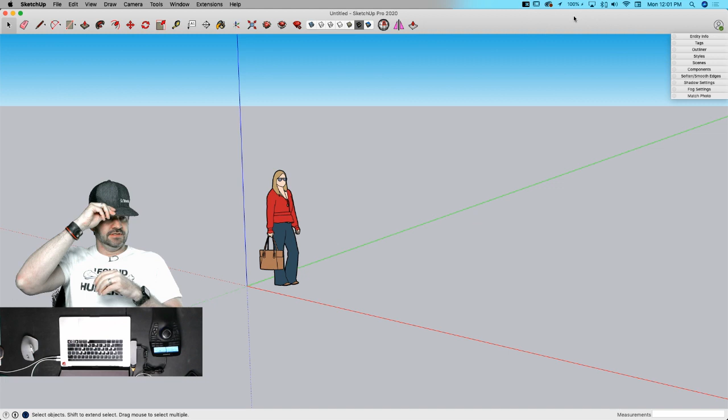Somebody, and sometimes Aaron takes a long time to answer a question, and then all of a sudden 5 minutes have passed, and then I try and answer the question, and everybody's already solved it. This is the perfect place for a guy that likes the sound of his own voice. I can't hear anybody else. So as long as I talk over you, Jody, then that's all that matters. You're pretty good at that, I've noticed.

So one question did already come up that I was going to get, just about to go off my screen. Hold up. Ronald asked over on YouTube, how can I display an extension menu?

The menu up here where it says extensions won't show up until you install extensions that populate that menu. So if you don't have any extensions installed, or if your extensions don't go there, then that won't show up. Some extensions, not all extensions, go here, by the way. Some extension developers will put them under tools. Others will go under draw. So not everyone shows up under extensions.

I think it's even possible to make one only appear in a context menu too, right? Like you could have an extension you don't see anywhere until you right click a thing. That sounds like it could be a thing. Yeah, that sounds like that could be real, and you just got to right click the right thing.

Corey, right beneath Ronald, was wanting to know if there's a schedule for these chats of ours. So as of now, we're doing something live at noon Mountain Time. That's now. So whatever time now is, look at your clock.

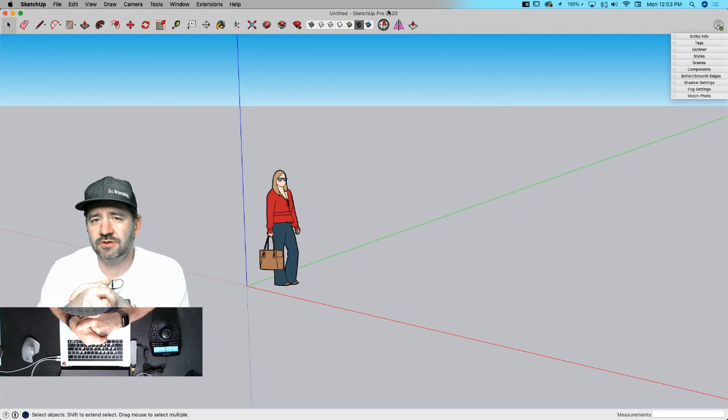I usually do a bigger model and we just kind of chat about a topic. So last week we talked about Star Wars and The Mandalorian and modeled the Razor Crest from The Mandalorian. So it's usually something along those lines. So Monday, Wednesday, Friday, hang out here at noon. It's anywhere from 2 to 3.5 hours, but we don't put a hard timeline on it.

I'll point out, I see some questions are coming in, so hopefully Jody's paying attention. Great, yeah, I did start. Oh, go ahead, I should say. Carry on.

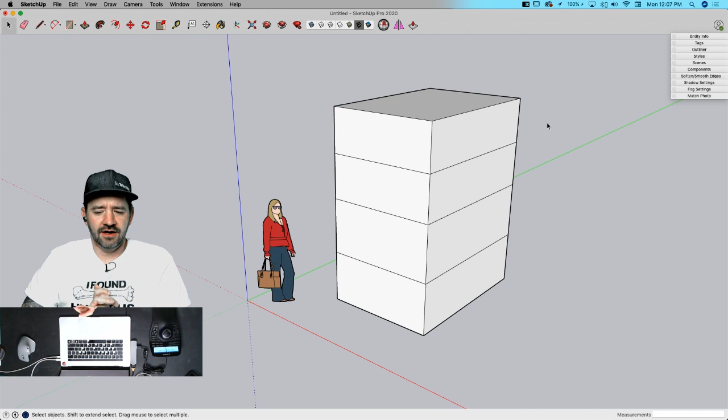We actually made a forum post out of it, so you'll have to do a little bit of digging. It was a blog post, actually, about the top 10 extensions, or not top 10, just 10 extensions I really like and find myself using a lot. Jody can probably find that and put a link to it.

As far as editing points, if you have a single point you want to move, you can always use the move tool, just hover over the point and move it. You don't need an extension to move a single point. If it's something you're doing a lot, like fine-tuning a mesh, it's a paid extension, but Vertex Tools does just that.

So what Vertex Tools is from ThomThom, and what this lets you do is actually go grab individual points, you can move them around with a widget, you can rotate that. Rotating a single point isn't very exciting. Let me grab 3. You can rotate a set of them, or you can even scale them.

So if you're going to do a lot of vertex editing, I can't recommend it enough. Vertex Tools is a great way to do it. The other thing that Vertex Tools is really nice for is if you're doing any kind of quad modeling. So if you're going to be softening or subdividing your geometry and you want modification tools that honor your quad geometry, Vertex Tools does that. So as I'm moving these pieces around, you can see all of my sides of my square staying 4-sided. But if I look at my hidden geometry, they're broken. So it's actually actively keeping this quad geometry there and available so I could come back and subdivide it later. So check out Vertex Tools and see if that's what you would like to see.

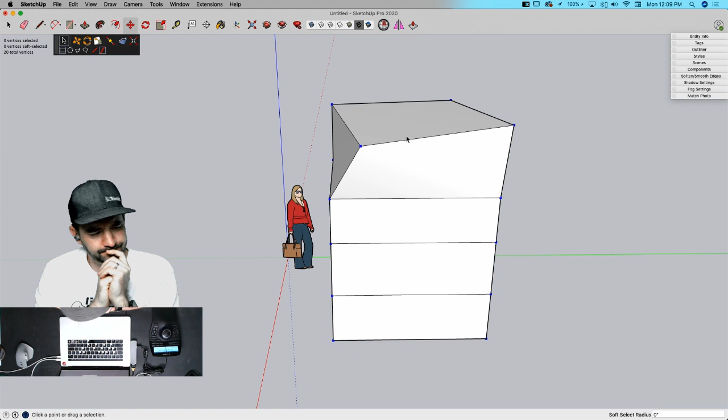Patchworks wants to know if there are plans to improve dynamic component stability. I don't know, I mean, it's probably now a good time to throw out the whole warning of do we talk about plans. We want to make everything more stable, that's for sure, absolutely. We're obviously working as much as possible to make things as stable as possible, make the best software we can. Unfortunately, Jody and I, when we started working for Trimble, signed a stack of papers about this - actually it was virtual, so I don't know if it's actually a stack of paper, but we agreed not to talk publicly about future plans of the publicly traded company we work for. So unfortunately, we can't really talk about what's going to happen. But to be totally fair, Jody and I spend a lot of time working in the world of what exists now. A lot of times I don't even know - I've seen some names go by, people who are on the beta program who work in SketchUp as it comes out in beta, and I don't even do that. I guess I hit a beta a couple weeks before a release comes out, and I'll go make videos for the release. I know Jody does the same thing because he works on our help center - sorry, I was adjusting my volume while talking - he works on the help center, so that's a big piece of what he does too. And we do try to know about what's going to come out, but we don't spend a whole lot of time there, just kind of dabble, I guess.

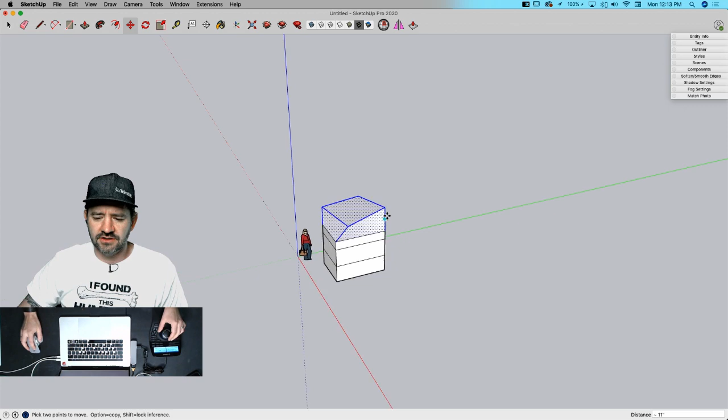That'll keep you from shooting off into weird spots. The other thing that can happen is, depending on where you're at, it can be grabbing. Right now I'm moving up and down above me, but as soon as I hover over this geometry, it's going to jump because it's grabbing this point relative to my first point. I'm guessing your view is weird, so you might want to zoom out. Don't turn on more geometry than you need as you're trying to make that move happen, and use your arrow keys to constrain your movement. I've had that happen before where I start to move something, it jumps off, and then I just orbit around and it's easier to move because I don't have that snap point getting in the way.

Yeah, it's curious that you can't undo it. That's the part I'd like to see in the model where that happens, because that sounds like an extension issue if that's the case. It's worth mentioning that a lot of times if you start an operation and things go wrong, if you hit escape before you click a second time, that will undo the operation.

Somebody asked how we pick which extensions we look at in our videos. Almost every one of them comes from something like this, where somebody says, hey, how do you do this? And it turns out an extension is a good fit. Then we'll take a look at it and make a video. There's no official submittal process that gets an extension onto a video. Most of the time it's just something somebody's asked about, so I end up looking at it and doing a video for it.

I do try to do videos for complete extensions that are available now. I've had some people send me beta extensions to look at, and if I have time, I'll take a look. But I don't try to do videos for stuff that's not complete, not available, or that I personally don't find value in. If it's some weird extension that helps you draw stars or something, and it's not something I've had any call to use in my personal design or the designing I do with you guys, it's less likely to get looked at.

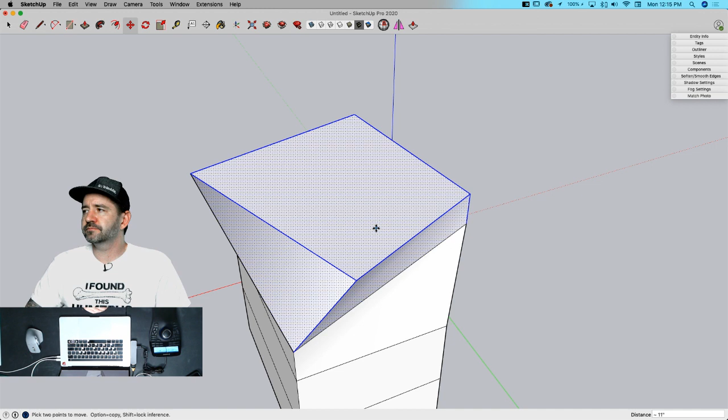Personally, and this is something Joey and I have talked about before, I like to keep as much conversation on the forum as possible. So if you've private messaged me asking how to do this or that, you've probably gotten the response: post this question to the forum and we'll help you out. Not because I don't want to answer or I'm unable to, but I'm a big fan of the forum and what it does and how it helps people and helps itself. I think that's part of what makes the forum so awesome - you can go ask, and that's the whole purpose, for it to be a community. Rare is the occasion that you get ignored, unless you're asking something completely off topic or not giving much detail.

Jim asked a little while back, so he may have already gotten this fixed. He said that sometimes when he's applying textures, SketchUp has a tendency to apply the colorize checkbox automatically.

Colorize? Colorize? I don't know if he means that it's like he's applying colors to something or. Well, let's go here and grab something. I'm gonna grab this one.

This is for you. So he has a follow-up question. He said sometimes colorize has been applied without his input, causing textures to have some strange color casting, like colors being applied to a material that's not the default color.

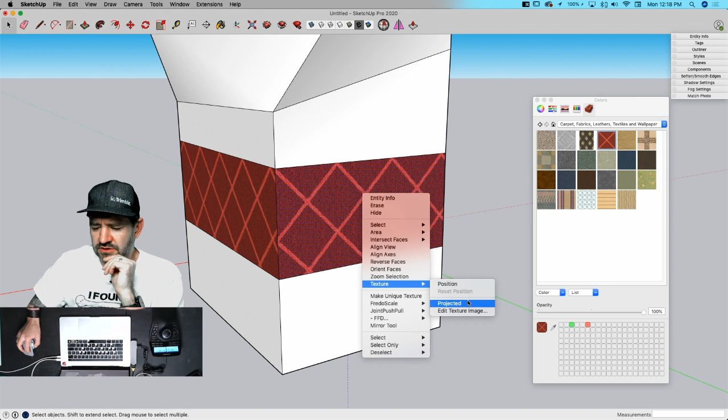Yeah, I'm a little confused, Jim. So if you want to clarify what you mean by the colorized checkbox... If I come in here to texture, if I grab just this surface and go to texture, I have the ability to change position and projected, but I don't know of a colorized option.

I don't, oh, unless it's a Windows only thing? Could be. Dave already asked him to post some stuff on the forum about it, so maybe it's something that can evolve there. Yeah, absolutely, if we can't get it here, let's definitely take it to the forum.

Okay, oh, I don't know what that one is. Oh, that's unrelated. So, Jim Saki, I don't think that's it. Saake, how would you pronounce that? I actually wanted to, worked with a coworker who had that last name. Sake. Oh, okay, all right.

He said, can your presentation show the option keystrokes on screen that get pressed when you model? So you have that on, right?

But do you do it in your other videos too, like some of the more proper ones? I do, it depends on what I'm showcasing. Sometimes it's not, and I need to do better about that. So I'm sorry if you've come across a video where I hit a shortcut key and didn't talk about it. My intention was probably that I didn't want you to get wrapped up on that, I was hoping you'd pay attention to the next part, but that's probably a dumb thing for me to think. So I do try to keep it on anytime we do these live streams, and I'll try to do better about making sure it's on when I do my recorded videos too.

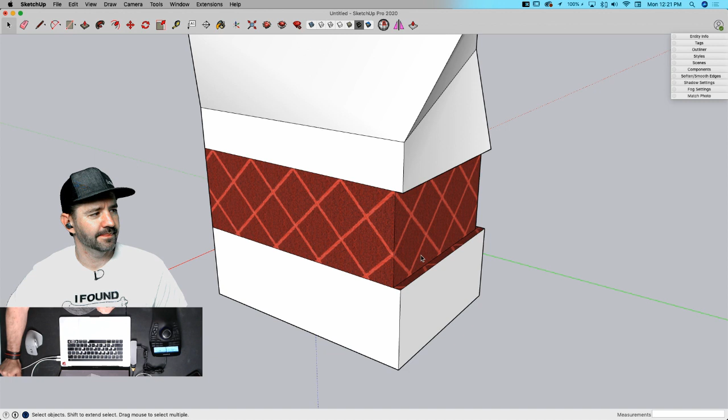What we should do is have a Reddit AMA where we have some engineers there and we can ask them. Hey, that brings up a good question.

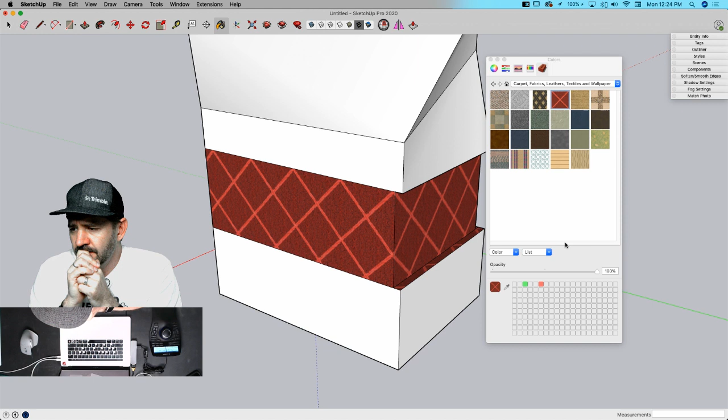Sorry, I went to look in the forum to see if there's anything there. There's nothing yet - nothing on colorization. Miguel's back asking for models of stuff.

I think it's worth mentioning, Miguel, that we're not really here to model one-off stuff for folks today. He wants to do a low poly Nissan Cube, which YouTube pointed out is already low poly by design.

Here, let's see if I can modify this into one. Let's get rid of this. Here we go, put wheels on it. There we go. Yep, so remember those commercials - was it the Nissan Cube that had the hamsters, boom, and the toasters, and the boom?

Tiny Nest said in SketchUp 2020, hovering the move tool over an object causes the object to become transparent, and it's causing slowdowns. This is a new feature of SketchUp 2020 - they're getting slowdowns on complex objects.

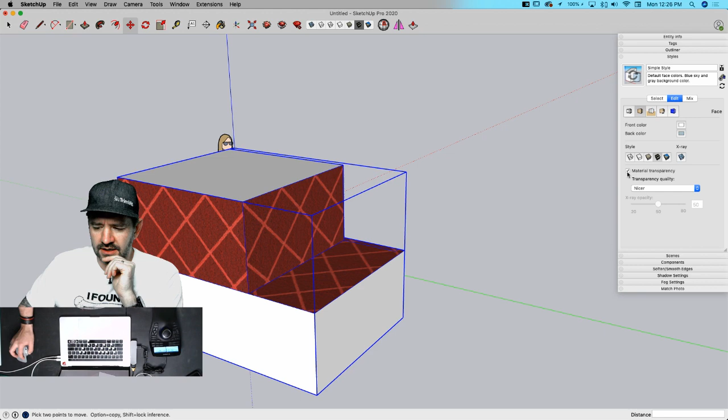Yeah, so if I move over the back corner right there, it does that. Let me make sure I show where this is correctly - if you go to your style, then edit, and click the second button, which is the face information, you have the ability to set your transparency quality to faster or nicer. You can actually turn that off, which will help with some of the speed there. That's worth looking at, because I know what you're talking about when you have a big scary model - it can all of a sudden do that thing where it sticks and then jumps.

But if you take a look at that, change your transparency presets, and that should help with that happening.

Julka wanted to know if you had any tips for creating a wicker basket. And while you're answering that, Hornox can't read your shirt.

Sorry. Humerus, is that like... oh come on, man, made from chickpeas? How do I kick a co-host off this thing? Where's the any key?

Dave says he's got an image uploading for us. That's good. Okay, wicker basket. Wicker basket, you have any thoughts?

I mean, there's a weaving thing I think would be the trickiest part there, right? So sort of organic. Personally, I would project a texture. I wouldn't, yeah, I know that sounds like a cop out. I have seen some people do it where they had the internal structure, the cane or whatever, come up like this, and then model the curves that go back and forth around it, do a follow me, and then copy and resize each one. You could absolutely do that, but if it's like a hero piece you're trying to create, that cool model, you could do it, but it's going to be super heavy, super fast. So that's the piece I'd be a little bit afraid of. I didn't mean to use that as a cop out, but that would be my first thought.

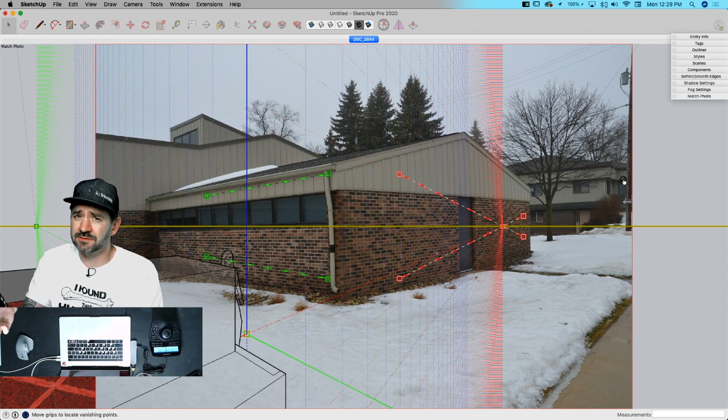Go ahead and import that. I'm going to import it as a match photo. All right, so when you start to... oops, I bumped my 3D mouse with my elbow, I'll have to lean this way. When it imports, it's going to import. So the first thing is the picture you import is probably the biggest piece of what's going to work or not work. That's why I didn't want to just go start browsing Google for an image.

You do want an image like this where you're looking at the corner. The secret to a good photo for Match Photo is these lines right here. So I'm looking at a corner. This is a corner of the building, and it vanishes off in both directions. What I mean by vanishes off is this bottom line angles up on my screen, and this line angles down. Same thing on this side.

See, both ways, they both kind of go like this off into the distance. That's what's going to let me take my green lines like this. There we go, make those across that line. And then this one, like this, gets a good vanish. See how my two green lines go like this? It's not a sharp thing, but you can see how they kind of go together off into the distance. That's what's important. Same thing over here on the red lines.

I would say 4 out of 5 times that people get frustrated by Match Photo, it's because they're using an image that's just not suited to Match Photo. So if you're looking at the side of a building straight flat on, that's not a good solution for Match Photo. If it only vanishes one way, it's not a good Match Photo. So you do want this perspective view that lets you see that off in the edge. It also probably helps to not have other stuff in there.

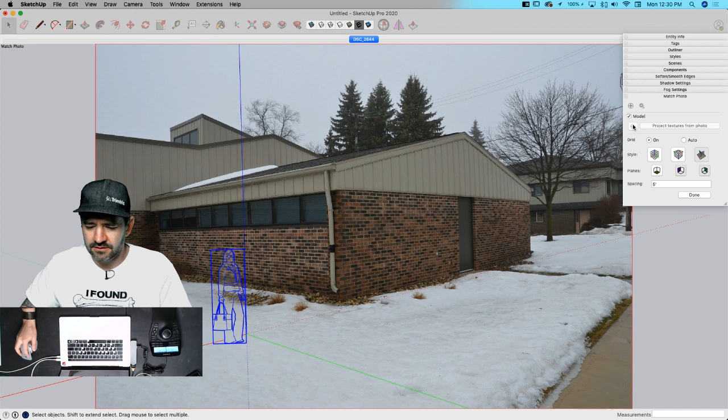There we go, go back to Match Photo. Once I get that in there, I can come in here now and say, okay, draw my line up, draw my line over, draw my line down. There we go. And I can push-pull that across like that, and start working from there. So I know that that is the same shape as what I had here.

Let me project that.

Oops, I think I just painted brick on Laura's face. Sorry. Oh, sorry Laura, wrong place wrong time. She's camo. Oops, I actually looked at... got her urban camouflage on. Just stand still, yeah, it's effective. Who's that creepy lady in front of the school?

So like I said, one of the biggest things would probably be just keep an eye on, or make sure you have the right photo to start with.

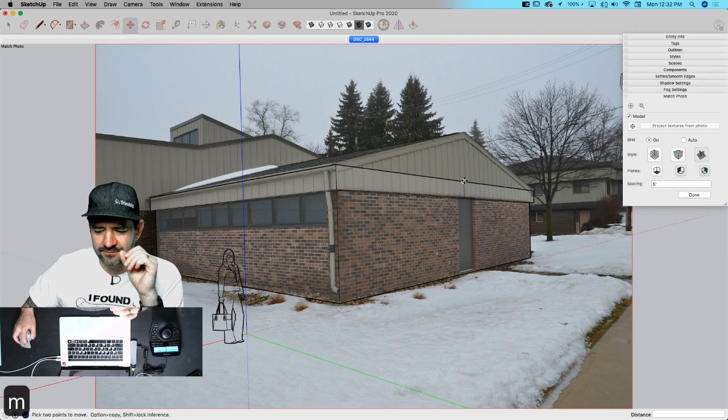Yeah, I think the comment I've always seen was like you don't want to use a cropped photo. As soon as you crop it, I don't know, I don't understand what magic is happening with cropping that somehow causes issues. Correct me if I'm wrong. One of the things that happens a lot is people will get photos that have been photo edited, so something has happened to the photo since it was taken, fisheye or something, and that'll cause an issue too, because that creates distortions that can't actually bounce back from that in reality. I know we're struggling to recreate reality here, so that could cause an issue.

Do you know if you can draw a rectangle about center in the web version?

I want to say yes. Okay, all right. Was that for an answer? I want to say yes.

If you hold down the Option key, is that right? That's not the Option key. That's the any key, yes. If I come in a rectangle, it says Option, or I think it's Control. But all it will do is toggle real quick between the two corners. Oops, unless you hit Z instead.

No, I can't make it happen. I don't know, oh, it might not be in the web version yet then. That is absolutely possible. Well, if I hit Option, it says Option equals select corner. And then I hit it again, and it says Option equals select center. So I don't know, maybe I'm just doing something wrong here.

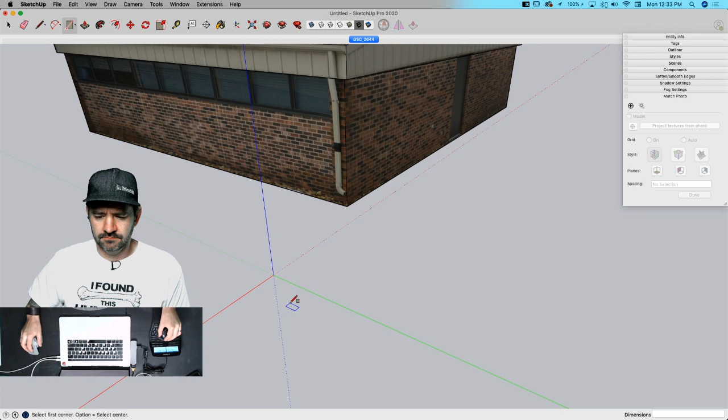In theory, yes, hold down or press Option to toggle between the two, or Control. Daniel would like to know how to apply material over a cupboard door so that it's one fluid pattern across both.

All right, let's look at that. I'm going to make a little example across two doors. Cupboard right here, this is my cupboard. I'll select that, make it a group. And then I'm going to put a cupboard door right here. Make that a group, and then I will make a copy of that group over here.

So we're going to say that these are our two cupboard doors. They're separate groups, separate materials right now. So if I wanted this to go seamlessly across, if I came in here and applied a material, I grabbed the brick off of the building. It's an odd one, but since it's not a repeating pattern, it doesn't work real good.

Oh, I know, I could just go, here, I'm going to come in here. Let's just say for fun that I had something like this, and I wanted to do... easy for me to say. All right.

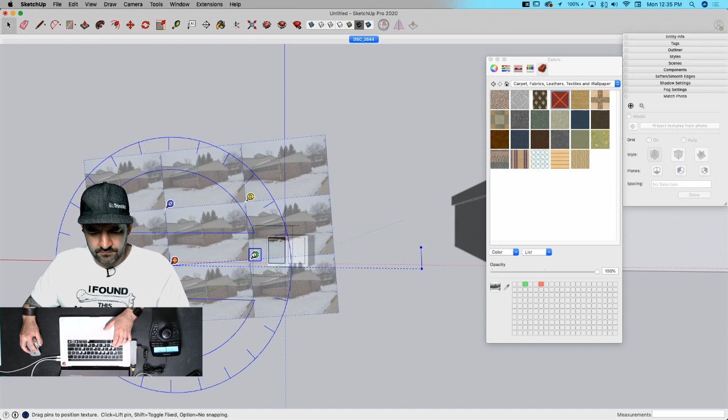Yeah, that would be a definitely good question, but let's say I had something like a photo. I wanted to actually put this texture across two things. These happen to be cupboard door analogs. So if I come in here and I put that... oh, let's go home. So when I put that on there, I get something totally different, even though it's the same texture on both. So what I can do is come in here, pick this texture from before, and then apply it here. That should continue the texture across both pieces.

If you just apply it by picking it from the color picker, it's going to reset the origin and any transformation you've made to that material, to each material you do new. By picking the same one from before, you're saying continue that texture onto this next piece. So that would be the solution. So if I wanted that texture to continue onto this piece in back, when I come in and pick it here and put it on here, well, that's because I just picked it, sampled the same one.

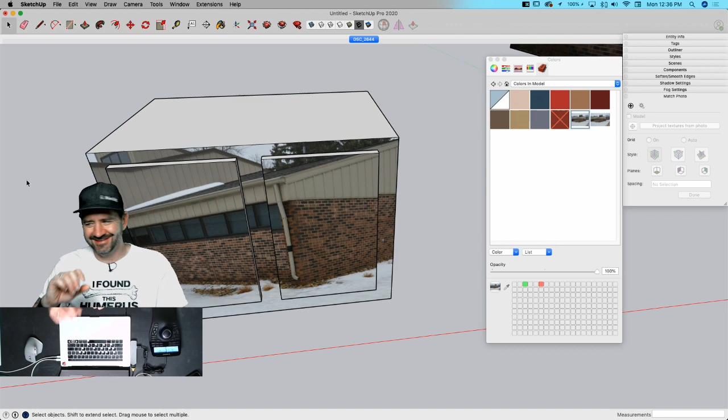Dang, I didn't get it wrong. Sometimes I can't help myself. Sometimes I get stuff right. Whereas if I was to pick from here and apply it here, that's what I should get. I'm sorry, I'm sorry you can't screw it up. I'm sorry, I'm so sorry. That's something we should all aspire to at some point, being so good that even when we try and break things, we cannot do it. Just can't get it wrong. Well, that's not true, you guys have been watching long enough to know that I can screw up if I really don't try hard enough.

Kai would like a dark mode version of SketchUp. That doesn't exist at this point, right? We haven't ever released one, we've only got what you see here. I have heard that request before. Yeah, I have too, but not yet. It's not there yet. There's a lot of chatter about the colorized stuff, so not new questions. Let's see.

I just saw a request for a SketchUp logo. I can do that pretty quick.

While we're waiting for more, I'm going to draw a square on the ground that is 3 foot by 3 foot. I'm going to pull that up 1 foot. And then I'm going to take two sides and offset it 2 foot.

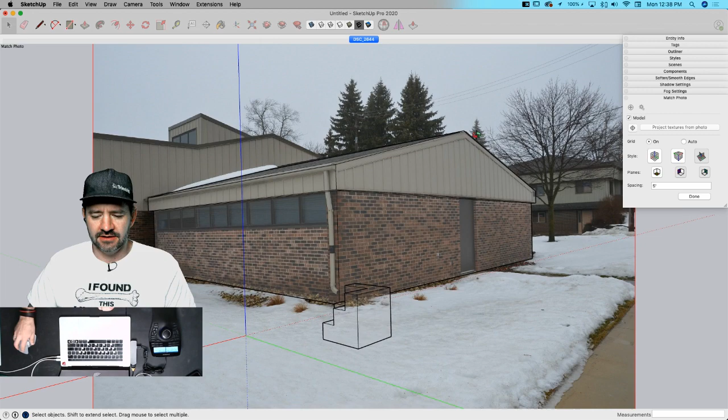In theory, yeah, reality, yeah, that happens. Yeah, you don't want to mess with that. Don't do it. Actually, just don't do any zooming tools, because as soon as you do any kind of zooming or orbiting, it's just gonna shoot off into crazy town.

Dave said the cropping thing, as far as Match Photo, cropping changes where the center is, which I guess is why it becomes problematic. Oh, that's good to know. So that's why stealing pictures from the internet can be risky too, because you have no idea if it's been cropped. Yes, I will agree with that.

So Nathan, it looks like he's trying to make the full push in Layout. He said he's using 2018, he's trying to do more work in Layout. However, Layout's not user friendly when it comes to scaled drawings, and I'd love to see a scaled drawing work more like a real drafting program, real in quotes, because it's not feeling like he's getting to work with that scale.

You recently did a layout video, right? Yeah, so we started a layout series. Every Thursday we're doing layout videos for the next couple months. I did 2 videos so far, just an introduction one and then one on modeling or model windows. But one of the pieces I want to do is scale drawing at scale. I say that because I haven't really got into it too much, I'm learning a lot about layout as I go. It's actually been something I have always known I wanted to spend more time on, getting better at layout. So I will take a look at that, Nate, and I might reach out to you to ask what we could do to make it more like other programs to draw at scale.

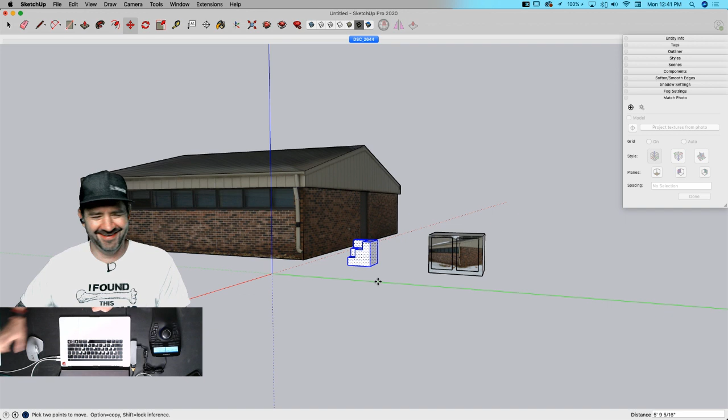Kai wants to know if you ever play Qbert on the SketchUp logo, and it's funny he mentions that, because Tyson's video from last week where he was literally making Qbert-looking drawings, I kind of wanted to play Qbert right now. That would be fun. I remember Qbert. I feel like the SketchUp logo is more like Crystal Castles, not Qbert. Did you ever play that? No, but I do go—it uses like a little ball, rolls around a little ball thing. Oh yeah.

And you have to pick up gems periodically, and you're a little bear, and then the bees come along... no, maybe I don't remember. Make sure you don't get stung by the bees. I don't know, sorry. All right, little tangent there. Okay, got it out of the system.

Let's get back to work. So it looks like there's a big back and forth with Kale, who was wanting to do draw about center. He's using SketchUp Make, and I don't know, it might be the old client version of Make, which did not have draw around center, rectangle around center. Yeah, I think it was 2018 that around center came out. That's what Dave's now said like 10 times in this thread. Yes, Make will not have draw about center.

No orbiting and match photo. Oh, that's the studio confirming what YouTube already said. Don't do it. No good. No bueno. Yeah, it is an important note.

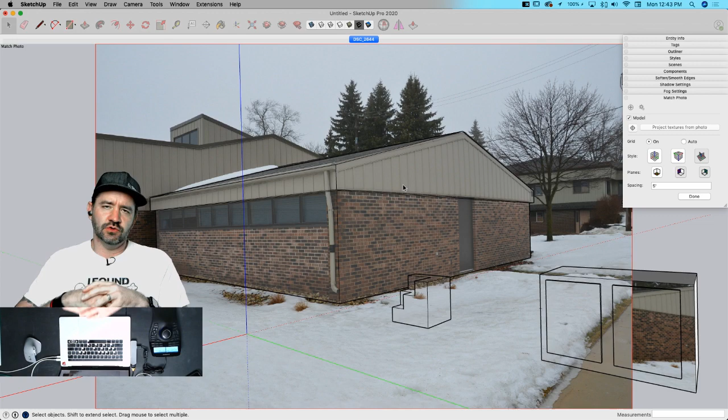That's kind of how match photo works—you're setting a camera at a specific location. So a lot of people ask, how do I model the other side of the house from here? You can use match photo to get the general geometry in. Once it's in there, it's just SketchUp geometry, so you can do whatever you need to at this point. But the actual modeling in that specific view is set from a camera at a specific point looking directly at that model from there. So that's important.

Looks like there's a decent chunk of questions coming in about Make. I want to be clear that we haven't made Make since 2017—that was the last version, release. And then after that, we moved to the web version. The intent with Make was never for it to be a professional application, which is why it doesn't have imports for DWG and DXF. It's mostly there for you to draw pictures or draw SketchUp models. If you want to do stuff more professional, like DWG and DXF formats, you get that in the Pro version.

Looks like they finally found the colorized version. I don't know if we've got the problem worked out though. Mike would like to know what the pink lines mean when you're moving stuff around.

Let's look at that. All right, here, I'm gonna make this into a group. I'm gonna grab this group and drop it on the roof.

Dave just said a friend suggested to him that if you added a HEPA filter to your Mandalorian helmet, you could make a fortune. Yeah, I think he's probably right. It's true, but there's still only one of them, and I'm not making more. Oh, do you have to give it to other people? Sell it to other people? Yeah, that's okay. Unless somebody wants to just pay me to put a filter in it, then we could do that.

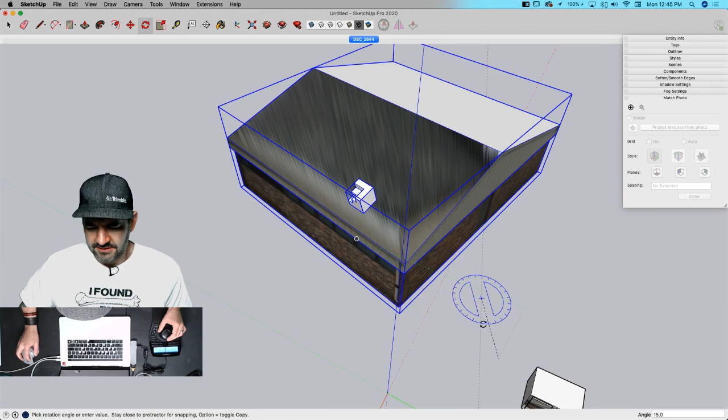All right, so I'm gonna grab all this and get it all off axes. Let's get silly with this thing. So if I go to move this right now, as I start moving it, I can use the keyboard arrow keys same as I normally do. We're here just constrained to green, red, blue, but I also have the ability of constraining to magenta.

Magenta is parallel or perpendicular snap. So if I wanted to move this along the roof parallel to this line, I can grab it, hover over the point I want to go parallel to, and as I move parallel to it, it'll jump and start moving parallel to that line. Likewise, I can come perpendicular to it, and it'll give me that magenta line showing perpendicular snap. I can force that snap by hitting the down arrow key—down arrow locks to parallel, a second time locks to perpendicular, and a third time turns that lock off. So magenta is actually two snaps, toggling between move parallel to and move perpendicular to.

Okay, that's a good question. Thanks. I like how in the big scheme of things, these are not pink or blue—it's cyan and magenta, puce. Well, it's darker than pink, so that's why I use magenta. But yeah, it's lighter than purple. I'm not correcting you, I mean, that is just the way. It is the way. This is the way.

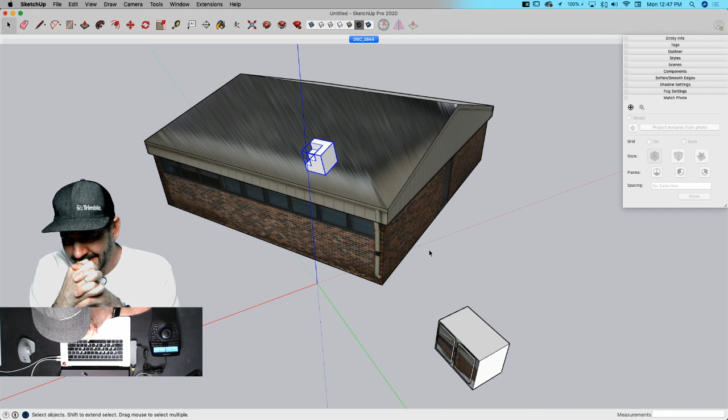Yeah, sci-fi warrior helmet. So it looks like we kind of answered a bunch of these questions about layout, or pointed out that we don't have necessarily good answers, and questions in the forum will be good, also keeping an eye on the videos would be good. So I'm kind of running low on questions - quick, ask something good. If I ignored you, it wasn't deliberate.

Isuru would like to see a gabled roof modeled. I think I just did that. They're also curious about using Curviloft on the wicker chair, in which case I would encourage Isuru to go look for...

Hey, let me search a term for that one. Let me throw something out here real quick. I'm gonna do wicker in like 5 minutes.

Right, so here's what you could do. So if I was to come in here and do something like this, and maybe I want to take this shape and I actually want to do something more like this. All right, so say I wanted something like that, and then what I want to do is get a line, midpoint to midpoint, and midpoint to midpoint, and I'm going to take one of these lines right here, copy it from here to here, and I'm going to draw an arc from the center point here to the center point here, take that arc, and I'll rotate it, make a copy of it like that.

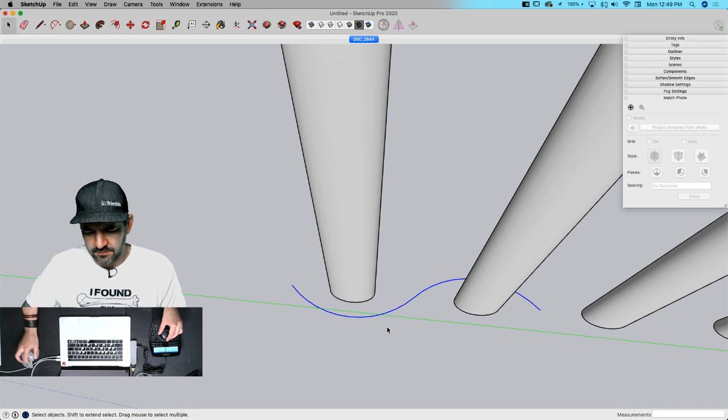And then I'll grab both of these and move it from the end of one of these vertical pieces to 2 down, and then say do that 5 times. Should take it all the way through. All right, and I'll grab all that and I will weld it.

I did that. Won't let me weld it. Okay, don't weld it, fine. Never mind, make that a group. And then I'll come in here, grab this same shape, copy that. Oop.

It definitely looks like this topic has come up a time or two on SketchUcation, but I can't quite find it. Something's going on with my keyboard.

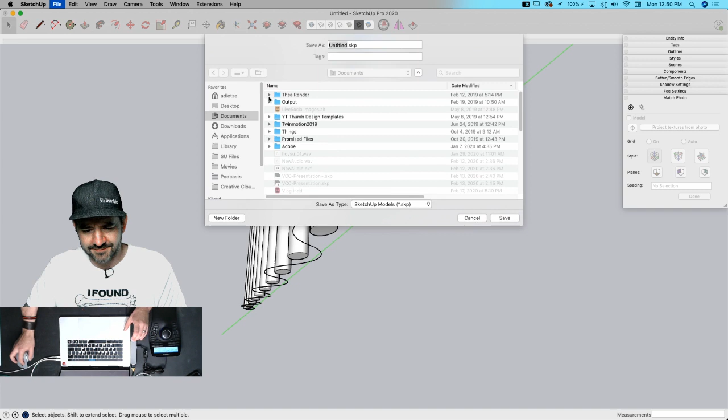All right, let me grab this. Command C - every time I hit Command C, it's ignoring my command. I also can't weld. Is it one of them Bluetooth keyboards? Maybe, but it's connected to my Mac. Hold up, probably because I haven't saved. Because you shouldn't need to - you're not really doing anything of import.

All right, we haven't figured out what we're doing Wednesday or Friday yet, right? I got an idea for Wednesday, and I think I have an idea for Friday, but we always take ideas. Okay, so well, Gavin's wondering if we already have what the plans are that we have already. And I just show up and look pretty, so I don't really know.

Just play to your strengths, my friend. All right, hold up, I'm trying to address the elephant in the room - no, my issues, just some of them. Don't worry, we're not getting into all of them.

All right, sometimes, you guys ever do this? You find that sometimes I'll come in here on like a Friday and realize I've had SketchUp open for 2 weeks straight. That never ends well. Right, yeah. I probably try and make a point of reopening it on at least a weekly basis. Yeah, I don't always do good at that.

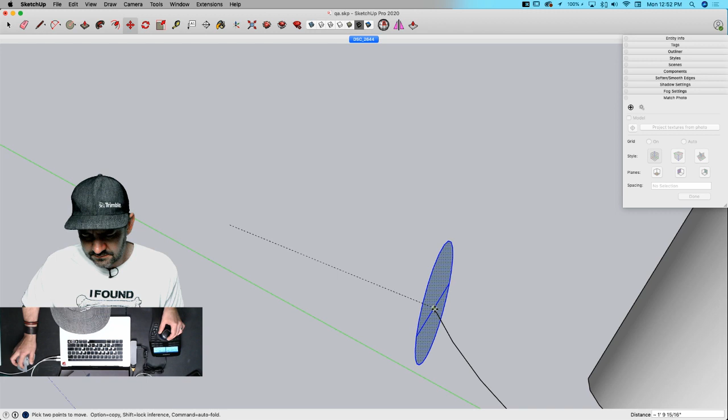So, anyhow, Gavin's asking if we can model a Lego tap, and I'm not sure what he means by a tap. Yeah, I don't know what that is. Could you clarify or post a picture of what you got, Gavin? Put it on the forum. Here, I'll even get you a link.

Okay, maybe, there we go, find it. All right, so I'm gonna take this whole run here, do a quick follow me with that. It's gonna give me one of those. I grab that, make it into a group, I'll move it vertically so it crosses this. All right, and then I'm going to take that option and bring it up here like that, and we'll do that like, I don't know, 9 more times. That's close. All right, and then I'll grab every other one, I will use scale to -1 to reverse it.

All right, so we got a basic wicker pattern right there. I left it inside out just so you could see the different pieces. But that piece, we could actually take all of that, make it into a group, and then run something like TrueBend.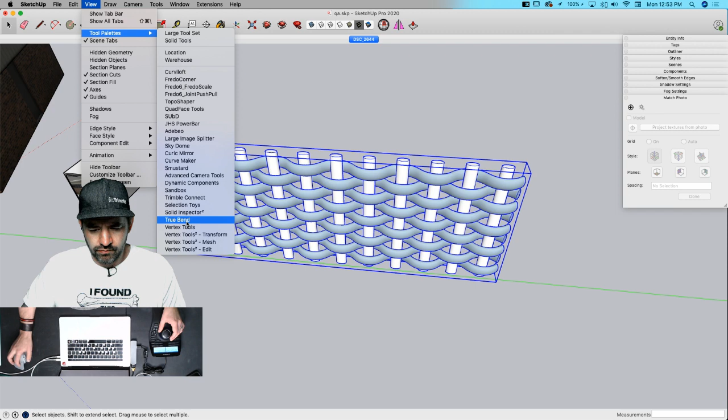Is there a reason you didn't do components for that? Yeah, I didn't have the 3 seconds to do that, apparently. I'm going to have to click a thing, type a thing, and then click another thing. Against the red axes.

Bender was wondering if you could model a blanket or a cushion pillow as well. There we go, so I could do something like this. Ooh, look at that. Now if you make that small enough, bam, that could become the cushion pillow. Wicker cushion, because who doesn't want that?

If you zoom in close enough, that's just what fabric looks like, right? That's true, if you put your eye close enough.

That's going to be a rough model eventually. This is a lot of geometry to bend, so this is going to take a second or three. But you could do something along these lines, make components, and then move those into shape using something like TrueBend or Flowify - I'd probably go for Flowify more, but I'm not good at it, so I didn't do that. You could do wicker something like that, but you can already tell this is already a lot. Let me just see how much geometry is just in this small piece.

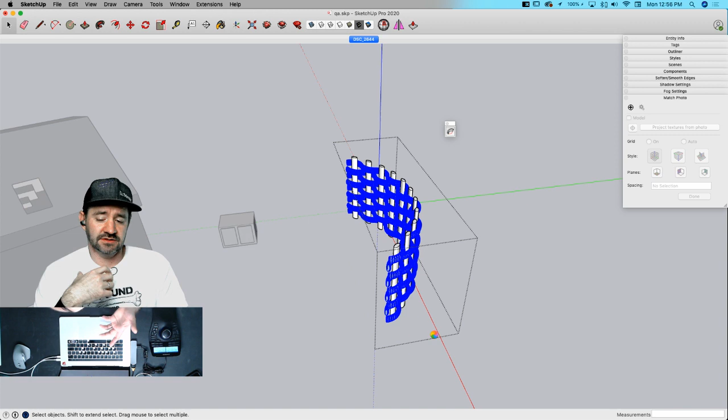Yeah, if you do want to do something like this, I would recommend doing a square rather than an oval. I know a square is not what it really looks like, but do a square and then soften the edges, and do low poly arcs. Rather than 12 segment arcs, do like 3 or 4 segments, and keep it all real low poly, because even with just this little piece there's a lot of chunks, a lot of geometry, and it's going to slow down SketchUp because it's just so much geometry.

All right, so we've got a billion faces. 15,000 from Andy, 544 from Kale, a billion, 21,000 from K Brooks. I'm going to say 21,001. Oh, is that how it is? Is this Price is Right rules? The nearest to the proper number without going over. I feel like if I were on The Price is Right and someone did the 'and one' trick, I would jump over my thing and punch them. It's like, what are you doing?

Seriously, just gaming the game, man. All right, I don't know, whatever it is, there's enough stuff here that it's actually causing SketchUp issues. Well, your entity info's collapsed, so maybe it's all been there this whole time. Yeah, I'm sure it has.

Do we have any other questions while we give this one more second? Let's see, Isuru has acknowledged you have a lot of patience, to which my response is, you're not even a doctor.

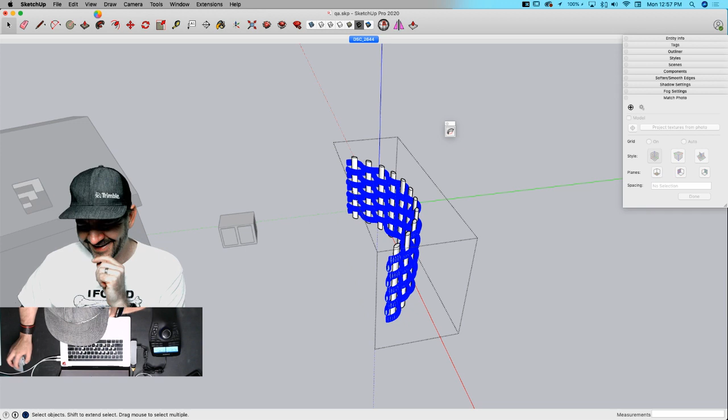Andy said that the pink color is actually cerise, which I've always heard as magenta, but I'm open to other colors, I'm not a colorist. Joey's no colorator, I don't see colors, I only see black and white. Oh, wait, no, those are colors, dude. Dang it, I see nothing, everything's just a wash, static. Right, there's not really... I'm scrolling.

There was a question of how do you change the loading logo, and why is it showing not responding from Sid. But you don't change the logo because the logo is the product, so that's not going to change - it's sort of like free advertising. As far as not responding, I would say probably because that sounds like the software is crashing, SketchUp for web maybe. That is not a feature.

43,688 entities, folks. Let's see who's closest without going over. Andy adjusted to 49.5. JDC—oh, decimal point's in the wrong spot. What is this? Amateur hour? Well, it's math. I think D-Hammer with 30,000 would be closest without going over. Nice work.

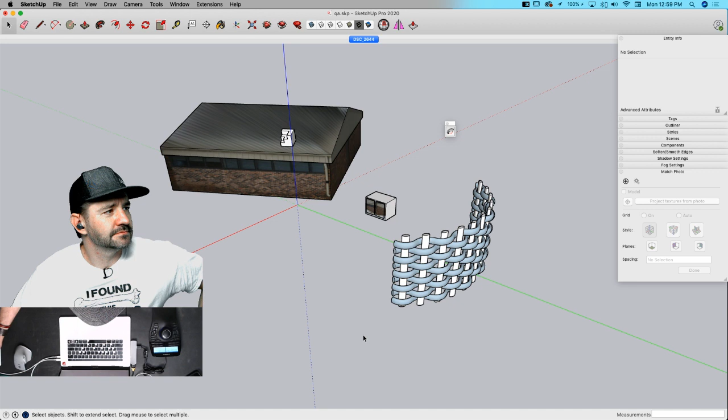Well, there's not much we can do here. Pruth Farage said his SketchUp file won't import to Lumion—file size is 70 meg. You should check out the Lumion livestream for that one, or head over and ask those guys about it. You can try reaching out on our forum too; we have a handful of Lumion users there, but for real help with that, you'll want to reach out to Lumion directly.

We've had a couple requests to model a 3D mouse—never gone for that one yet. And Gyrus chimed in asking for a curved ramp. I don't know if he was baiting you, because that seems to come up every week at the Q&A, two or three times.

Dave said to reset the axes. Did you change them? Did you move them? No, I moved this—I rotated this, so it's gonna be a mess if I go into here, because I broke things. I broke them good.

Have you heard anything about the 3D Basecamp? Any news? Still nothing official. I want to say something, as much as everyone wants to hear something—but dang it, okay.

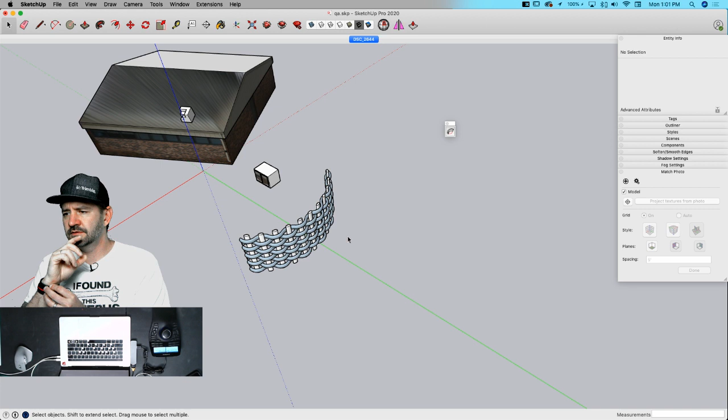Julka asked to look through the comments about Colorize, and honestly I've been sort of skimming past because there's a lot of them, and I didn't think there was continued discussion. Is there currently an outstanding question about Colorize beyond the picture posted on the forum and the acknowledgement that it's a feature in SketchUp for Windows? A couple people said what it was and that you can click it off. Jolka said for Colorize, it only happens when you add new materials, and then it changes color to sepia or different tones—turn off the Colorize option and it will work. That was a problem they were having last week, but I don't know if that's a bug or something to fix. As stated earlier, neither of us are really familiar with issues with Colorize, so if you're having an issue, go look for the issue someone else has created, or post a forum post about it so people will talk about it and developers will see it.

How to make a spiral conveyor and make it dynamically adjustable—that sounds a little too big for this show. I don't know what all those things are, but for SketchUp, I'll say spiral stuff is difficult, especially making it dynamic, because as soon as you move up a spiral, you're not just moving an array, you're moving around and moving vertically. So with spiral stairs, it's not just a question of move this step this direction and do it 10 times to get 10 steps—you have to move up and over, up over each one. There is, I believe, an extension—Move Copy or something—that makes that easier, where you can take something and copy it relative from here to here multiple times. But I don't know specifically what that thing was called.

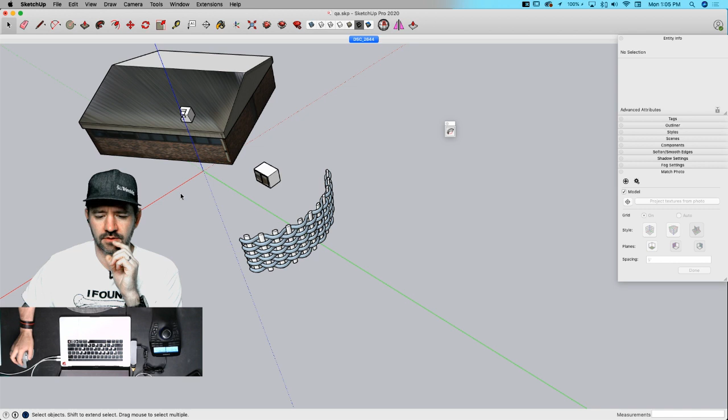For a couple of degrees? There's magnetic north and there's true north. I've definitely run into that. I guess if you're past the point where you're worrying about what's on the map, then just unlocking it and rotating it from the axes would probably work.

The reason I say that rather than moving the model directly: if I take everything here, get a group on here, and rotate it 2 degrees, now I've moved my model. The problem with the axes is anytime I come in here, right click and hit reset, it's going to go back to where it was. So temporarily moving it and then doing anything that resets it is going to put it back. I would probably say rotate your model relative to the axes and leave the axes where it is. That would be my initial thought.

I said magnetic north, but Dave shouted out solar north, and I forgot that. There used to be solar north functionality in SketchUp. It's moved out as an extension now, so you have to install it separately. It'll give you basically a fourth axis, an orange line showing what is north according to the sun and solar calculation. That's a good tool to have turned on, and would probably be the best thing to take a look at.

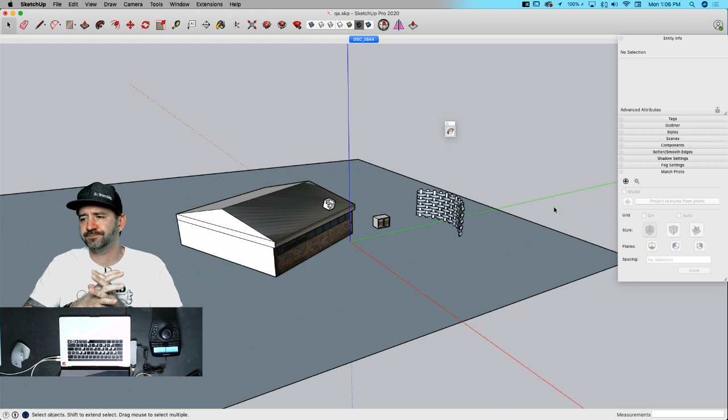There's an updated image in the forum post now. When he says tap, Lego tap, it's literally a tap. I thought that's the only thing I could think of, but I thought surely that's not what he meant. So how would you model that sucker?

I don't have the exact dimensions in front of me, but what I would do would be something like this. Forgive that the dimensions won't be perfect, but this process would be the same. So I would start, and see how close that gets me with this shape.

Okay, so I'm gonna have to do a little stretching here. Pull this down a little longer. Move this vertically. After this, you have to make Lego beer.

I was going to say you have to make a Lego die, and that way you've got a set.

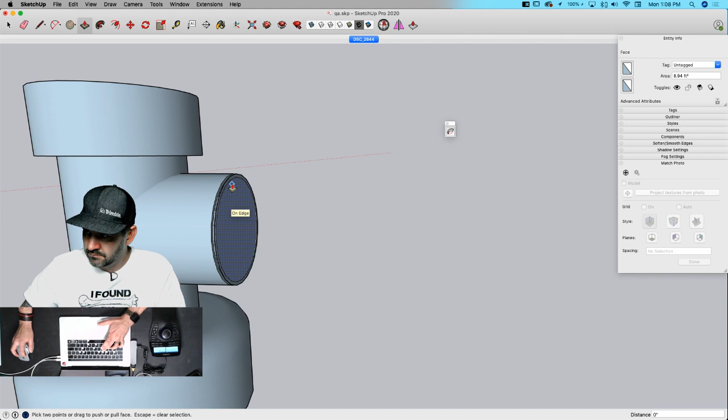And then this last piece, I'm going to close this real quick so I can put this in like this. I'll offset that ever so slightly, pull that out, pull that out. Broke something, there we go. Actually, let me do this, I'm going to scale this down anyhow.

Did you have to model any of these for the aluminum Falcon? This was not an issue for me, no.

Oh, all right, because they don't wash their hands in space. That's right, you ever notice that? Nobody ever... oh, I guess they do sometimes. I'm gonna go a little geeky with a Star Wars question. If you've ever been to Universal Studios, they've got the Harry Potter world, and you can go get butterbeer and drink that. What would they have at the Star Wars world? What would you be drinking there? Blue milk, that was going to be my question. Do you get it from one of those big... oh, they just have whatever those creatures are, things sticking out of the wall. You got to go squeeze your own out. I don't like that. I don't like that at all. Ew.

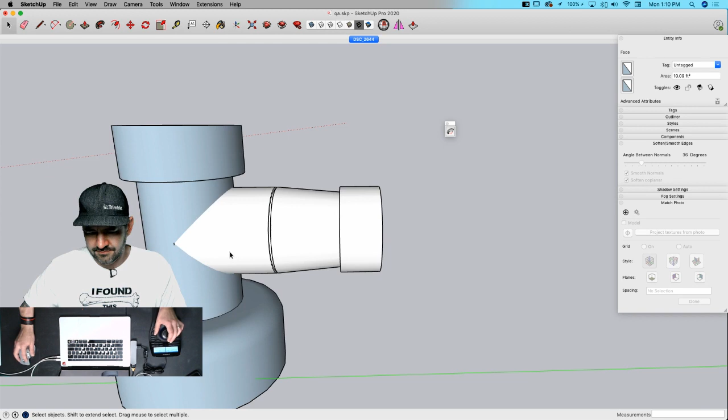YouTube's wondering why I always say aluminum Falcon. The reason is there's a short by Robot Chicken. They did a whole series of Star Wars mini skits done in stop motion with puppets. In one, the Emperor is told the aluminum Falcon blew up the Death Star, and he responds, 'What the hell is an aluminum Falcon?' because he misheard Vader. So now I just always call the Millennium Falcon the aluminum Falcon.

So thank you. You're saying it's the Emperor's fault. It's the Emperor's fault, I'm just quoting the Emperor. All right, it's really funny though. I encourage everyone to go watch Robot Chicken Star Wars, just do a search for it.

I would do something along those lines. I don't have any of the dimensions on there, but yeah, something along those lines. It looks pretty close to good. I mean, it's better than the one I was drawing.

Yeah, so if you scaled that then to, what is this? This would be 8 millimeters, I think, across here. That would get you to the right size.

Oh, Dave posted pictures of what he used, that match photo that you used. Looks like he added some raised garden or raised beds, maybe? Is that what those are, Dave? I like that, yeah, that turned out real nice.

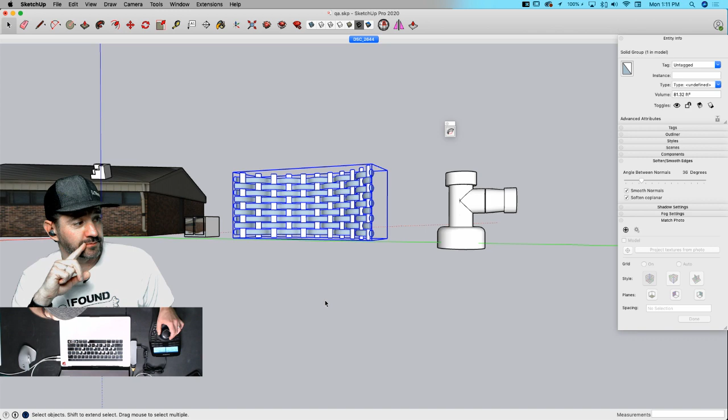So Transom said he's all right, he didn't care what you say about me. So I want to know, what did you say about me? I'm sure it was positive. Are you praise of some sort? Yes, well, undying appreciation, accolades in general. Oh yeah, okay, all right, whatever.

Mike Bogart said, how come on PC, when you hit tab while drawing a box or other shape, the current dimension size disappears, and that doesn't happen on Mac? I think what happens is sometimes people hit tab because they think they need to go into the dimensions box in the corner. Tab actually moves through your UI, and it does happen on Mac too - watch this, if I hit tab twice, it does stuff, it goes away. So you don't have to hit tab, that's really the secret. I'd say the way to avoid that problem is by not hitting tab at all.

Nathan's still looking for the SHX thing. I'm gonna go see if I can find anything about that too. I'd just throw out the question - I don't know, but like I said, I've always heard you have to use TTF files or OTF files, that's what SketchUp supports. So even if they're showing up on your system, I don't know that Layout has the capability of displaying them if they're not OTF or TTF. Just doing a search for SHX, it looks like it gets referenced back to AutoCAD a lot. So it must be a CAD font, but maybe it's an Autodesk proprietary format.

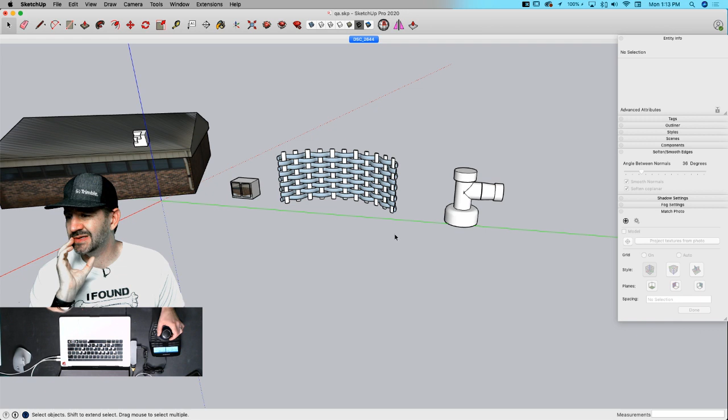If that's the case, whenever I go look it up... Yeah, the odds are against us being able to do anything with it, huh? Yeah, fileinfo.com actually says SHX was created by Autodesk, so I think that's where the problem is going to lie. But it's worth looking on the forum to see if there's another option, if there's a way to convert an SHX to a TTF or something like that. A lot of times there will be knockoffs - not that I support knockoffs, but you might be able to find a font similar to it that's in true type format or OTF.

Spurs man Matt asked if we've encountered instances where creating a group from a slice can make geometry in the slice non-coplanar. I haven't seen anything like that, I've never seen that happen. If you have an example, please put it on the forum, because that's definitely something that shouldn't happen - no reason for it to happen. Sections are flat and they are a single plane, so making that group should work fine.

Alejandro said it's some kind of holiday today. Hey, Jerry and I had that last Monday. It's a holiday, meh, I like holidays. Holidays are the best.

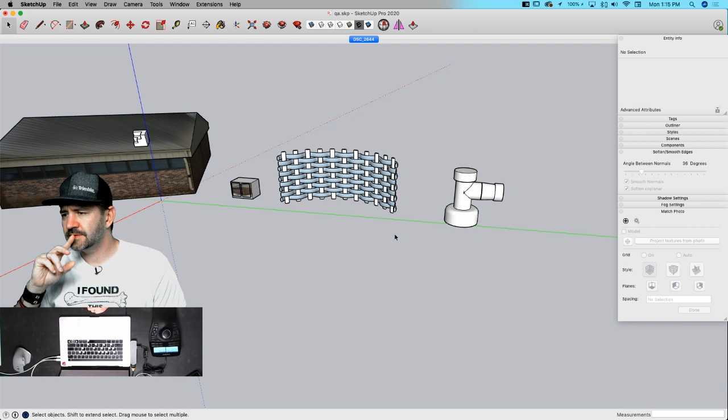Yeah, I think we need the converter. And it looks like I'm out of questions again. So I see Sid on YouTube asking about creating a perfect circle.

SketchUp doesn't create arcs, it creates segments. But that's not quite as straightforward, because the data for the actual arc or circle is still stored in the SketchUp model. So if I come in here to draw a circle, I think I know what you're talking about. Let me do that again and draw it at a specific size.

Colin answered right after too, so your answer might be the same as Colin's. When I create this circle, it has a number of segments here, and it has a specific radius. So this is a circle with a 9-foot radius, drawn with 24 segments.

So the actual circle that it knows about has an arc from this point to this point, but it's basically rounded down to 24 segments. I think what you're talking about is coming in here and saying, what if I put in 240? Now it looks more like a circle. No matter how many sides you put in, you can put 999 sides on there, but if you zoom in far enough, you can still see it's made up of a series of straight lines.

So there is nothing you can do inside of SketchUp to change that. That is how SketchUp functions, and that's part of the reason. It's not a NURBS modeler, it's not a curve modeler, it's a face modeler, or polygon modeler, surface modeler. It creates a series of flat surfaces.

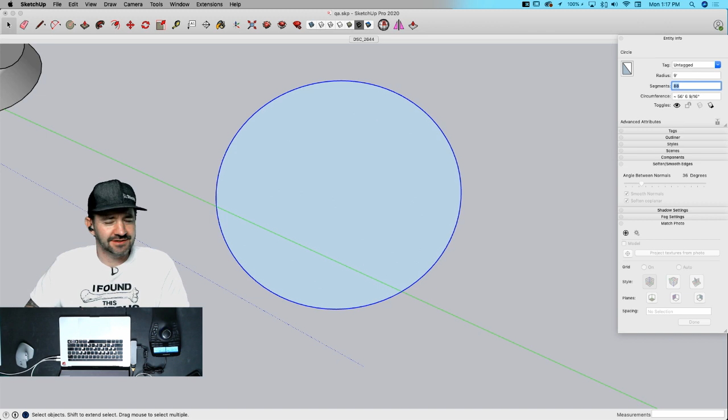Yeah, make it look like that—we need somebody to get on that extension right now. Squint level to distance from camera. But in actuality, calibration at the beginning.

In all actuality, it depends on what you're doing with it. If it's staying visual, that's one question. If you're exporting it—say this is going to a 3D print—how big is that print, so how many faces do you need? If you're exporting it to something like a DXF file, you can actually export it as true curves and a full circle. So those are all things to consider.

So it's unfortunately not quite as simple as how do I make a perfect circle in SketchUp. The circles are all perfect—it's just how do you represent that to the level of detail that you need.

Is that pretty much what Colin said? No, Colin was basically saying when you go out to DWG—sorry, if you're taking it to a CNC machine—the data is there that treats it like a circle. So elsewhere, you can take it out and it'll become a circle again.

Okay, so Kai—I saw this one and then I forgot to ask it, and then I forgot that I didn't even remember to ask it. He's looking for a method to quickly paint or arrange rivets, bolts, or screws on a model. I'm presuming he means more than just a linear array, but it would be curious to see.

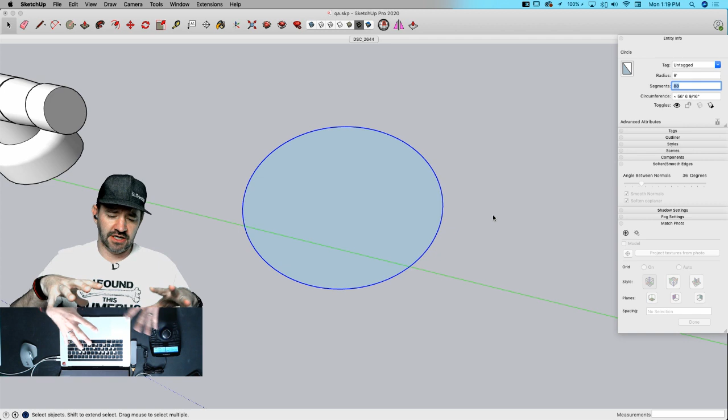I mean, doing any kind of arrangement is all about arrays. He's saying painting, so I'm wondering if he's got a slightly different plan with that. I would assume if you're putting rivets, bolts, or screws on a model, you don't want them random, because when you talk about painting geometry, what I start thinking of is something like scatter or drop component, which will let you put your geometry in and just kind of spit it onto whatever you have.

If you're doing something more like bolts, then you probably want to be a little bit more precise, like along aircraft panels or rivets along a wing or something like that. So what I would recommend, let's do a rivet real quick. Eric on YouTube suggested component along path. That would work, but I have a slightly different idea that I want to show because I think it's a good idea.

How's that? Well, you do you. So yeah, one thing I would recommend is like Eric's saying. I'm going to say this whole panel, I want to put a rivet a certain distance in from all the edges. So what I would suggest first off, I'm going to re-weld those.

The first thing is going to be to get some reference geometry. So if I take this arc and I move it a foot in, and then I'll grab this one and move it a foot in, and then I'll grab this line and move it up the arc a foot. So I do this thing.

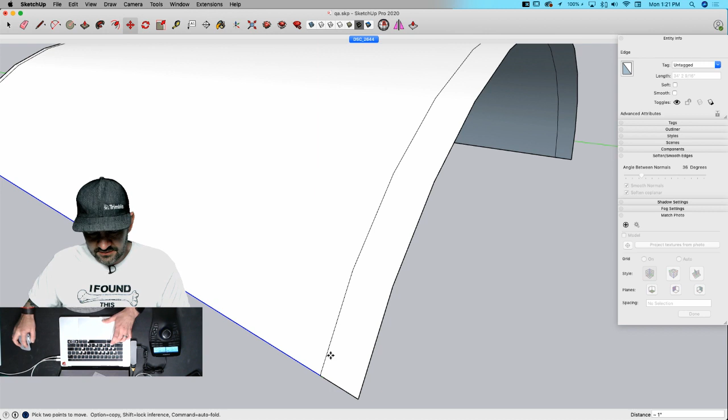I use this Logitech mouse, and one reason I really like it is I have gestures on here. One of my gestures is if I hold down the thumb and push up, it goes into move mode. So when I'm doing a lot of editing, I find myself pushing, pushing, pushing, and all of a sudden my mouse is up here on these cables and off the screen because I'm just moving my mouse slowly up. You need a bigger desk. Apparently so, and a bigger overhead camera because I need a wider shot so I can keep moving. And longer arms, or I need a spring that just pulls my elbow back this way every once in a while. These are obviously the only solutions. All right, that seems the most logical.

All right, so what I want to do is put a rivet here and then maybe, I don't know, just along here. And this is where something like copy along path is a great extension because it'll let you say how frequently along this path you want to put the thing in. But the thing you put in is very important too.

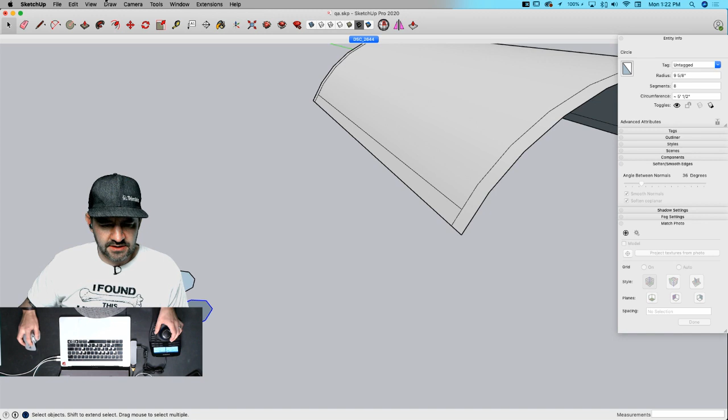So if I was to model something like this, I'm going to do a low poly, we'll do an 8-sided circle right here. I'm going to do one this way, and then one this way, and grab this one and say follow me with this one, and get a little sphere. So this is going to be my low poly rivet. I'm going to grab that, reverse the face real quick, and make it into a component.

When I make it into a component, there's two things I want to do. I'm going to call it my rivet, and I'm going to set the component axes. Now this is the important part because I want to set the component axes in the middle of this thing. So if I come across from here and across from here inside, that's going to let me set it. I got to rotate just slightly, might have to draw some geometry. There we go. So that's the point that it will place it by. So when I do that, now I can get rid of X-ray.

When I come over here and actually place this component... why do I have so many? Oh, because I'm not in my model. There are so many components on 3D Warehouse. Now I can just, whether it's place along path, or if I pick points to drop it on, it's going to drop it by that middle point. So that's one option with a rivet where I want a rounded head popping up.

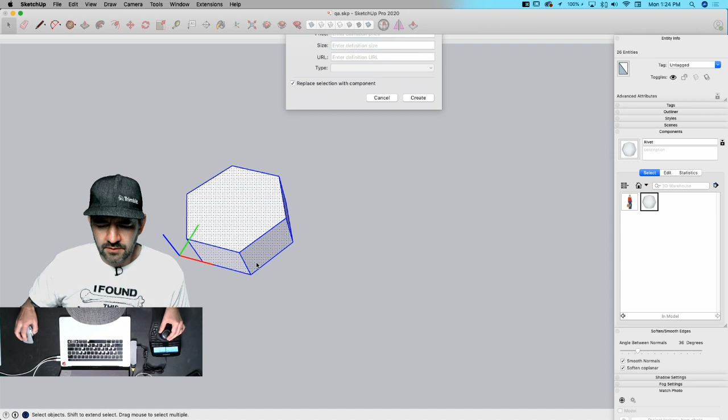If I'm doing something more specific, like let's do a hex head screw real quick. I realize just how big these things all are, by the way. With something like this, I could take this and grab this and make it a component. But I'll do two things: one, I'll set my component axes to the middle of the head again, right here at the bottom, but I'll also turn gluing on.

So what happens now is when I grab this and bring it in, look what it does. It follows that arc. So as I put that one in, it's going to follow these shapes that I dropped that geometry onto.

So these are just a couple of thoughts as you go in and put those pieces onto your model. The reason I didn't do glue with the sphere is because the sphere, as it hits, if I cut it off flat, it would always be sticking up as it hit something. I wouldn't hit on that flat geometry, so I just had half the sphere always underneath. If you wanted to, you could come back, explode them, and then intersect the geometry.

The other option, like I said, is to copy along path. So if I grab, let's do a simple array. If I grab this one and say move a copy, modifier key, to copy it all the way down to the end, and then I say divide by 12, it's going to put 12 copies across there. That's super easy with a straight line like that.

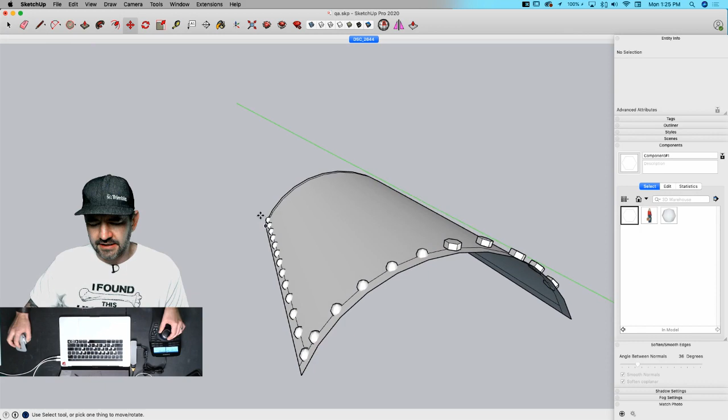If you have something bigger, let's break this. I can use something like it's on the power bar. I think if I select these, and this, and then I say copy along path. Is that the right button? No, this is copy along any path. Nope, that's not. That's guide points.

Oh, they're so small. Okay, so JHS is a compilation of other people's extensions, right? What if you already have some of the extensions installed that are included in that? I'm presuming you probably did. Did you run into any issues when you installed it? No, because as far as I know, it puts it in its own.

That's divide. Sorry, hold on one sec. There we go. So I put it along the path with that many copies. Distance between, I could change that to 3 foot. That's pretty cool.

Yeah, I didn't have any issues with that myself. I have heard that you have some options that I didn't even know about, but I can't find it. Somebody said there's options for the power bar, but I haven't actually. There's probably a button, one of those tiny little buttons up there.

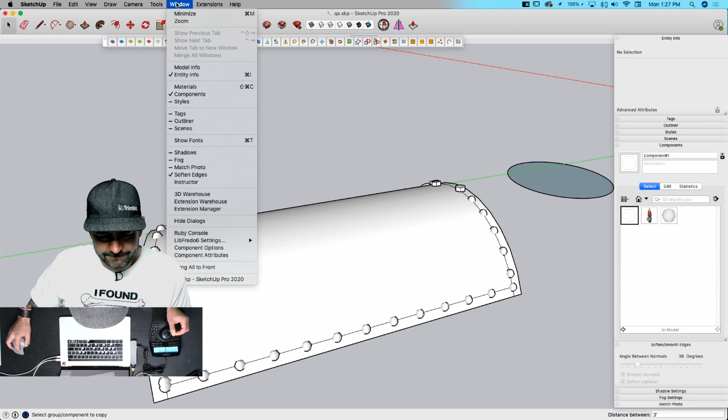MCAT said you could use the rotation tool and copy along the arch. That would work too. For this, I probably would just actually grab my first one, say rotate it along. Except I broke my arcs. Yeah, you could use a rotate array just like I did a lineal array here. I could do a rotational array around that other edge. But yeah, that was kind of an explosion of thoughts about that. But I would say the thing to keep an eye on is getting the path that you want to copy and then making sure the actual pieces you copy onto it are properly set up to save yourself some pain or discomfort. Headache. Yeah.

Eric also said Profile Builder. You can do quite a bit with that. Profile Builder continuously amazes me with what you can do with it. It is really, really cool, but as you pointed out, it is a paid professional extension. It is also something you'll have to be prepared to spend some time learning. It's not a tool you just throw on there and start doing stuff. It's a big one, but it is good. Especially if you do any kind of architectural work, it's a great extension.

Cool, Kai said that was useful. So good job.

Fam Civil Engineer asked up above, and then he kind of dug deeper into it. He was curious about the new stuff in 2020.1. I think we talked about this last week, maybe trying to cover some of the 2020.1 stuff, but he's asking specifically about the new functionality in the scenes tabs.

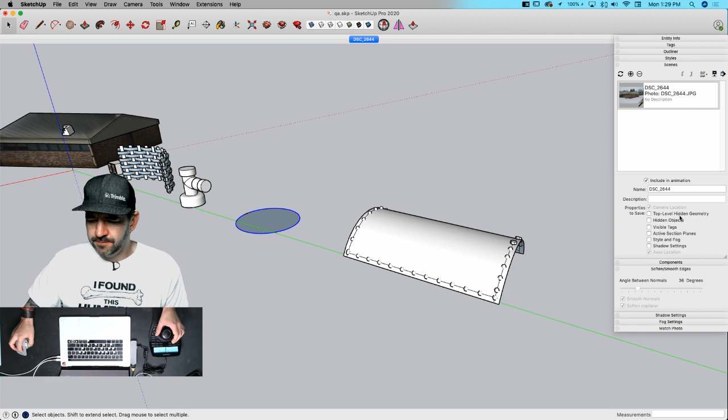So there's a change in 2020.1 with show hidden—originally there was just show hidden geometry. These are both 2020.1. In 2020.0, we called out there now being objects, but we didn't have a way to separate that in scenes. So in 2020.1, we added this in scenes, so you can have more granular control. That's this right here.

This is the ability to hide things. So if I take this house, which I made into a group, and hide it—same as if I went into my outliner and found that group and hid it—and then turn on show hidden geometry, in previous versions, 19 and back, that would show my house as hidden. But you can see here, all it does is show geometry that is softened, smoothed, or hidden. Separate from that is hidden objects, which is like my piece that's hidden.

It is possible to have pieces that are both too. So if I grab this and hide it, now I have a hidden object, and I have a hidden object with hidden geometry as well. That is possible.

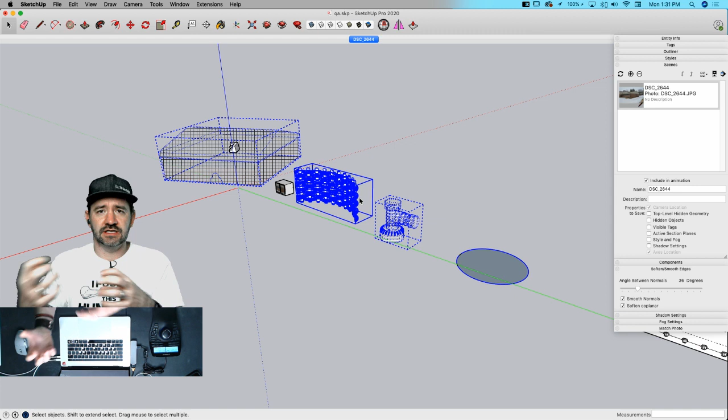So what this says, what scenes tracks here, is top-level hidden geometry—so at the highest level, what's visible. And the reason it says top level is because I can nest. I can take these three pieces and put those into one group, and inside that group, something's hidden or not hidden, and inside that group, pieces are hidden or not hidden. It turns into kind of this spider web of visibility.

The only thing saved with the scene is the topmost geometry. So if I come in right now, this is what the normal view looks like—those two pieces are hidden—and I create a new scene. Go ahead and create that.

Now if I come in here and go to hidden objects, and say okay, unhide, unhide—if I go back to this scene, they're going to become hidden again. Oh, except I didn't turn it on. Hold on, let's turn everything on. Oh, there you go.

These checkboxes are so powerful and awesome, and I'm always having to futz around with them a little bit to remember what I did or didn't. It's definitely, you got to have your head in the right space when using them. You do have to have them turned on in order for them to update that information. Yeah, I guess it makes sense when you say it out loud. So now it all makes sense whenever I think about it.

But if I turn those back on and jump to the scene, they're going to be hidden again. Like I said, the confusing part is that top level—the outside container. It doesn't at this point give you the option to update sub-levels. If I group these together, my outliner can have groups inside of groups inside of groups, and unfortunately it doesn't track all the way down for that visibility—it's just that top level. So that's what that means. Good question, that's a really good question.

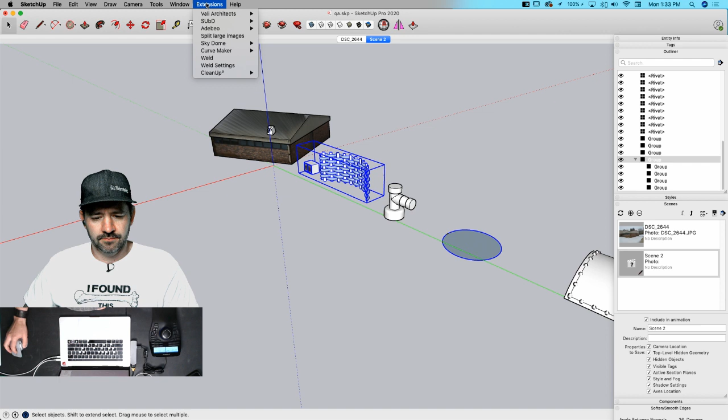Endless Fix said he's seen that you have, or have had, draw catenary before, and he's run into issues with the percentage function, like typing 105%. Have you used draw catenary enough to have encountered that? Or is it one of those that got purged?

What's that again now? What does it do? You might not have it anymore. I don't see it. Is it part of JHS Power Bar? I'm not sure—tell me what that is, and then I'll tell you what I thought about it. Endless Fix, elaborate, and we'll come back to you.

Sid asks, well, this is kind of philosophical I guess—he said SketchUp's 3D modeling software, why can't it have its own 3D rendering software? I mean, obviously it's a design decision, but it's answers in the question, I would say. Oh, you get philosophical, I would get right back at you. Yeah, we're really good at making modeling software, and rendering is a different beast.

If we put every feature that everybody wanted into SketchUp, nobody would want it anymore. At some point it would start to get too bloated, and it would become too confusing to use. That's part of the benefit of Layout being separate.

Now we don't have to spend any time thinking about paper space. I always use the term core competency - what we know we do well is simplifying 3D drawing. We try to make sure that everything we do when we add something new or change something inside SketchUp, that it's still around that core competency of modeling in 3D space. So adding something like 3D rendering is not only outside of that piece we're focused on, it actually adds quite a bit of complexity and additional functionality to what we currently have. That's kind of the simple answer, I guess.

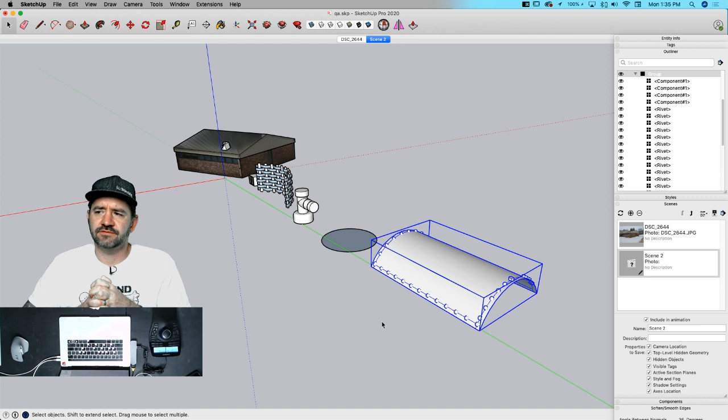Oh, draw wire, yeah. I did use draw wire and I did show something, but I didn't use the percent function. I think it's probably just turned off - I don't think I uninstalled anything, I just turned a bunch of things off. I thought it was cool because I've had to do that before - drawing wire, looping from one piece to the next using just the curve isn't always easy, especially in a populated model because it tries to jump around. So it was real easy to just click and it would draw an arc straight down. I didn't play with that part very much though. So yeah, it looks like I don't have it anymore. But oh, here it is - wire tool.

So it's not draw wires? Well, I think the UI on screen actually says draw wires. Oh, it calls it draw wire. Yeah, see, it's called draw wires here - just to keep you on your toes. All right, so if I click here, the arc length is set to 110% right now. So if I come in here and go from here to here...

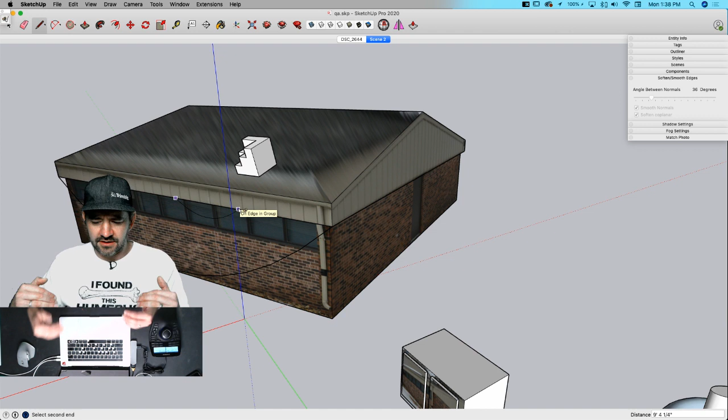So, okay, with that I'm pulling an arc of a specific length. That's cool, this is neat. I like this now - if I say 50 foot and click here, I'm pulling a 50-foot wire along. I gotta go remake that video because this is so much better. And then if I do a percentage - you can't have a percentage less than 100% because that wouldn't be long enough to loop.

So you'd have to do something like 150%, which would give you... he was saying 105% was his example. Okay, so if I come in here and say 105%... oh, I don't type percent very often. Oh, there we go. No, that looks longer than 105, doesn't it? Well, now I don't remember what his original question was. 120%. That's pretty neat, I didn't play with that enough because that's cool. I like that. Oh, so his question was, can you make it work? And at a glance, I'm going to say yes.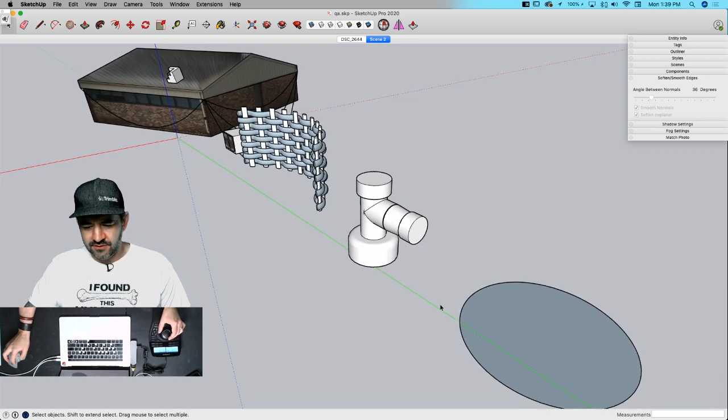FatKid73 asked, how do you automatically hide everything except for the component or group you're working in? By pushing this button right here - click. That's no good, you gotta... everybody else doesn't have that button. That's true, I can't find that button. If I come in here and double click into this, this is the normal view - everything gets grayed out except for the thing I'm working on. Up here under View, Component Edit, you have the ability to hide the rest of the model or hide similar components. So if I say hide rest of model, everything outside of the thing I'm working on now gets hidden. This, in my opinion, should be the default - this is what you should have just turned on normally. Every once in a while you might have to interact with something outside of the container.

As you're in here editing, you probably 9 times out of 10 don't want to see the rest of the model. If you edit a component and click on it, even with Hide Rest of Model turned on, it'll still show other examples of that geometry. So go to View, Component Edit, and that's where Hide Similar Components is. Turn that on and it hides everything except the one component you're working on.

You can assign these to shortcut keys, which, if you do a lot of component work, is a good way to organize your model. But remember, assigning shortcuts is context sensitive. So if you want a shortcut key on Hide Rest of Model, double click to open a component or group first, then go into Preferences and Shortcuts, and you'll be able to find Hide Rest of Model. It's all context based when adding shortcuts.

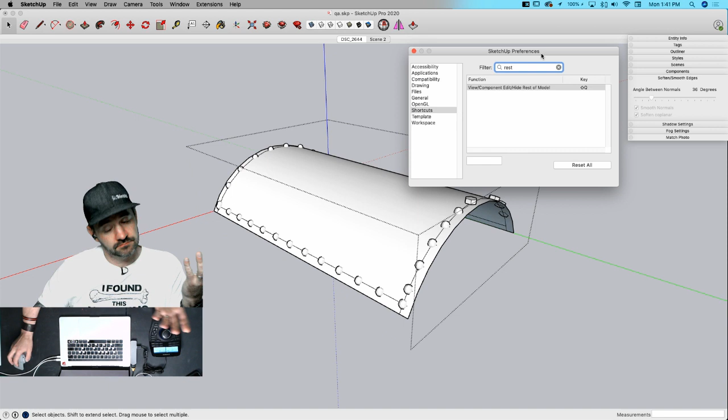I actually like to leave the rest of the model on because a lot of times I do inferencing. Since most of the time I'm doing woodworking, I want to find the center of a different piece of wood, so I'll infer off of that. Having a shortcut is the best of both worlds. That's my personal thing, I usually leave it on, but it's just whatever it was last time since I have it as a shortcut. So you usually turn it off, but can easily turn it on when you want to.

That's a good question.

David Onstott was wondering, he said he's having problems where whenever he makes a new surface, such as a rectangle, before he uses push-pull he has to reverse the face or it'll have no bottom when he pulls it into 3D. You shouldn't have to. We've talked about this before. When you first draw a shape on the ground, the face is facing down. This is intentional because the idea is you're going to take that shape and pull it up into 3D space, meaning the bottom should stay down. Some people come in and reverse their face before pulling it up. You can, but you shouldn't have to.

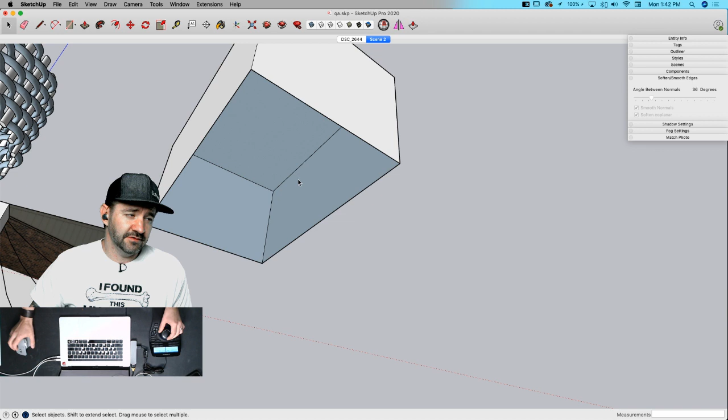If you pull this up and you're getting this for some reason, something's wrong. I don't even know how to make that happen. I'm trying to think of why that would occur. By default, when you draw a rectangle and do a push-pull to pull it up, it should just automatically work. That's the design intent. It is possible to change stuff around, though.

Or what if you draw it on a face? Or if you're drawing a rectangle on top of another rectangle? That definitely leaves an opening, say if you nest a rectangle inside of that. Well, the other thing I was thinking is when you go to push-pull, if you're hitting the modifier key to make a new face and you pull that up, then you might get some weirdness down here.

So when you go to push-pull, see if there's this little plus next to your cursor. Let's get out here. That plus says create a new face, don't push-pull the existing face into a single solid. So it's possible that something like that is happening and causing weirdness. Two adjacent faces, ah, that's it. Yeah, that'll do it.

Yep, so if I do this, that will cause odd stuff to happen. In that case, that's actually a spot where you want to hit Option and pull that up, and that'll create it like that. As soon as you have connecting geometry, the rules change. So that's different from having a rectangle on the ground and push-pulling it right away. In that case, you might want to grab that and reverse the face, that might make it a little bit easier.

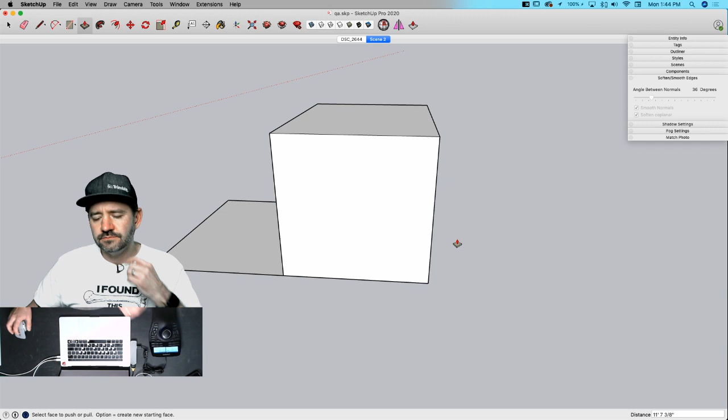Okay, so Akbar on Facebook would like to know how to change the topography contour according to the needs of the master plan tourist area. I don't know what a master plan tourist area is, is that specific to a plan? The answer would probably be using Smoove or Move, probably Smoove.

If I come in here, I'm going to do this super quick. Jody can link in our Skill Builder playlist, there's 2 videos we did on the sandbox tools, and those go through quite a bit of how to do general editing. Whoops, these are set big.

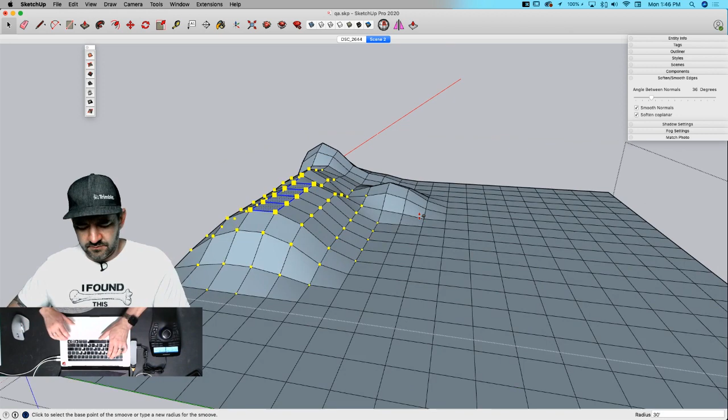The short answer is the Smoove command, because Smoove will let you go in and move geometry around. I don't understand the specific question about a specific space, but one thing you can do with Smoove is pre-select. So if I have a section of geometry supposed to move, you can come in here, grab a section like that, use Smoove to move it, and adjust the fall off appropriately with the UI. So if I want to make that like 30 foot.

Are you planning to create an actual playlist for sandbox tools? It was just 2 videos, so I wasn't specifically planning on it. There's nothing new coming, yeah, so that kind of covered it all.

Looks like you had a live modeling, a SketchUp live modeling terrain back in 2018. Yeah, that's a while ago. That's probably worth looking at.

Yeah, I think Gavin... Dave, gotcha. Yeah, Andy reminded that the landscape one was the bobsled, where we shot a bobsledder into low orbit. Oh, nice.

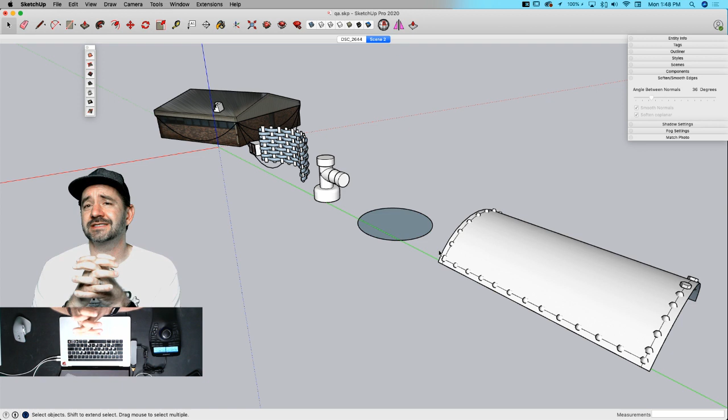There's a bunch of other people that make great videos - SketchUp Essentials and Master SketchUp are specific ones. Come watch our live streams Monday, Wednesday, Friday. Help do what you can to develop your workflow, because everybody uses SketchUp a little different depending on what they're trying to model. That's the piece where you're going to have to reach out and get creative as far as finding how to do exactly what you need to do in SketchUp.

I'm still here. Hi, you're just answering all the questions. I'm scrolling back looking for any questions that come up. Looks like there's a whole bunch of discussion back and forth with Gavin and the grinder thing. Nice.

Andy's asking about modeling a dynamic nut and bolt, and I guess my question would be, what would you want dynamic wise out of a nut and bolt? Yeah, I guess so you can make a longer bolt. What if you had a 1 inch and you want to make it a 2 inch and just extend the threads? Yeah, I guess that could happen. But...

There's some, like, I've seen a couple of times people have asked about parametric stuff too, so that's I suppose a valid question. Closest we have to parametric is dynamic components. What's that other one we always mention and never have the link to? I always forget it, I think I wrote it down last time.

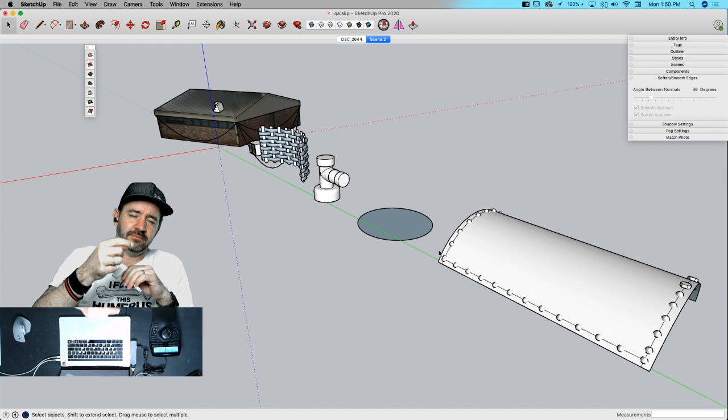I think what you would want to think about is, again, how are you going to use it? Because it would also get big very quick. If you're going to put a dozen bolts on something, drawing all the threads is usually not something I recommend. Instead I'd have a component of a head with a washer on it, and then a component of a nut with one revolution of a bolt on the other end, and have the dynamic part be the distance between them. Then you could just slap that onto the thing that's being bolted, and the important pieces would be visible, and you wouldn't have to worry about all that spiral geometry on the inside that's going to make your model heavier that you're never actually going to see.

If it's something for like a hero detail where you're doing a section cut showing the thread running through something, then yeah, you could do it. It would just be a matter of repeating that geometry using copies, similar to the videos I did on dynamic components. Look at the one that made the ladder and showed the rungs going up - you do the same thing. You just have one revolution modeled, save that as a component, and then you just repeat it.

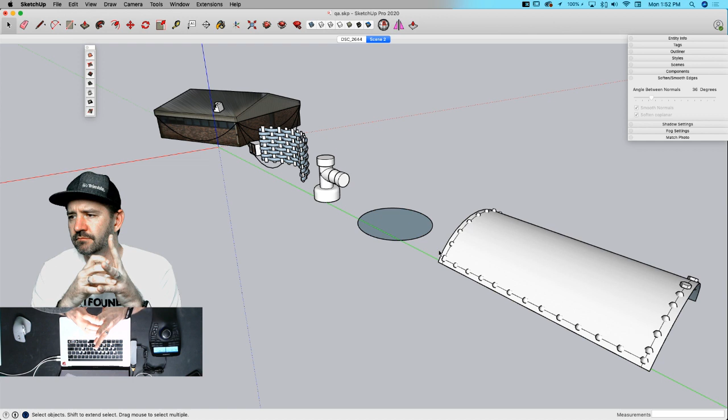So it looks like there's been a handful of questions that have popped up from Fam, civil engineer. One of the first ones he was looking at was basically understanding exporting to OBJ. He's tried to dig in deeper, like the YZ, swap YZ coordinate. Do you have any advice, just general advice about OBJ exports?

I haven't done a whole lot of exports with OBJ specifically. I have exported some, but the ones that I've done I've basically used whatever the defaults are, hit export, and then import it into the other thing, and everything's worked fine. So I haven't really had to go much further. Is there specific issues you're running into, or you need to understand better, I guess, would be the question?

It sounds like it might be a question for the forums too. If there's a specific thing you're trying to do, a lot of times when we get questions like that, the good thing to do is to dig into, okay, what are you actually trying to do? Because then we can trace back how to help, since sometimes you don't know how to ask for something that you don't know how to do. Are you going to Illustrator? Are you going to a CNC machine? That kind of stuff. So what's the purpose of the OBJ file?

A question saying what you're trying to do on the forum will probably find somebody who has done the same thing and maybe be able to help you with that. So let me just say, when you post on the forum, always say what you have done and be clear about that and show that you've done something, because sometimes some forum members might not respond well to just a generic 'tell me how to do this' question without really exploring anything on your own.

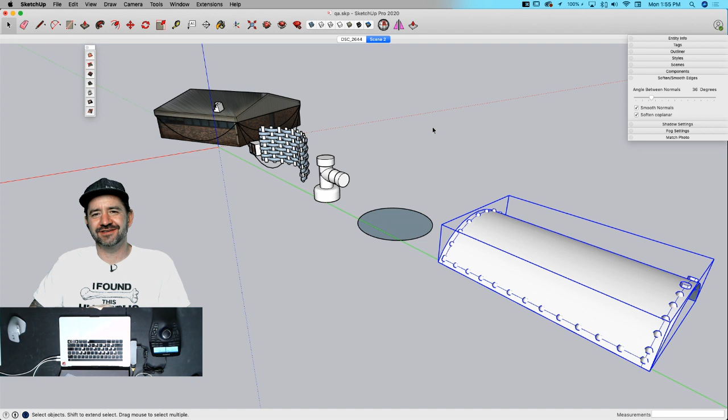My actual suggestion would be use a PNG with a clear background and just make a face-me component out of it. Because coral, that's sort of like adding threads to your bolts in your model.

Exactly, it's adding a bunch of complexity that's going to make the whole thing kind of bloated. So if it's a hero thing right in the middle, I would look at Erode from Eneroth. I would go in and create a crazy shape and then just hit it with Erode a bunch of times to make it chunky. But it's not going to go in and make a series of pits like Coral has or anything like that. That level is like when you probably want to get into bump mapping and that kind of stuff. If you're just putting it in SketchUp for entourage, then get a PNG with the background cut out, transparent, and make a face-me component out of it. That's going to have the least technical overhead, if you've got a complicated model.

Daryl is wondering how to chamfer edges manually. I'm not sure what he means by manual, but it seems pretty straightforward.

If you want to do it manually, go in and offset the amount you want. So I'm going to offset this 10 inches. And then I can take this piece, push it up 10 inches, and that's about as manual as I could think to do it. Yeah, that looks pretty manual. And you got manual on all four sides. Well done.

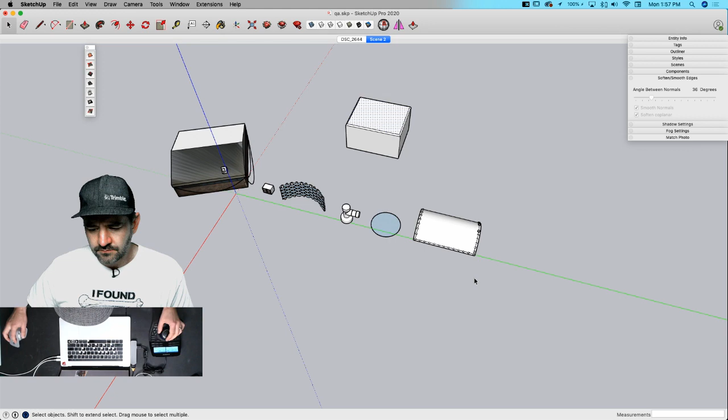Thing number 1, make it big. Make it bigger than you actually need it to be, nice and large. Make sure that in your preferences, under OpenGL, use maximum texture sizes is turned on. That's going to get you more detail in your drawing. If you pull it in big and it's still fuzzy, take a look at the extension Image Splitter, because that'll break your image into smaller images to get you a higher resolution.

That'll get the best image in there for you, but when you go in and start to draw, a lot of times, if I'm going to come in here and draw lines over these black sections, I can lose my lines in there. See how my black lines are actually showing up really well in the, I guess it's not dark enough drawing.

But if you get to the point where you're drawing over black and you're losing your lines, that's where you either want to turn on X-ray. X-ray is going to give you a paler version of the drawing, so it's easier to see on top. Or go to your styles, edit, go to your edges, and change the color of your lines to something that stands out, like red or maybe yellow or green, something that shows up better. Switch to a different color, because it's real easy, especially if you have a drawing that shows lines, to start losing that detail. So those would be my handful of tips for tracing an image.

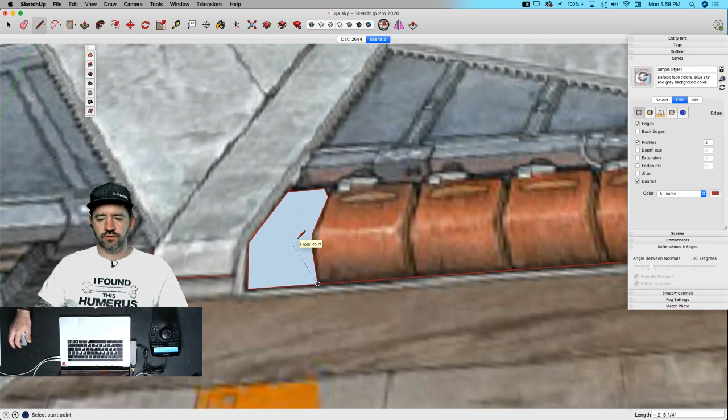All right, we got one more? Well, there's different levels of complexity in some of these. Oh boy, thoughts on Pixar's USD file format? Probably not much there to say.

Is there a more correct method for creating a model for 3D printing? Always model solids. Always model large and then scale it down for output. That's gonna get you the best detail. Those are probably my tips there.

I would also say, remember you're modeling for 3D printing, so don't draw something that's the width of a piece of filament if you can't actually print it. I've seen a lot of ruined prints come out because it's trying to print things that are too small for the printer to actually print.

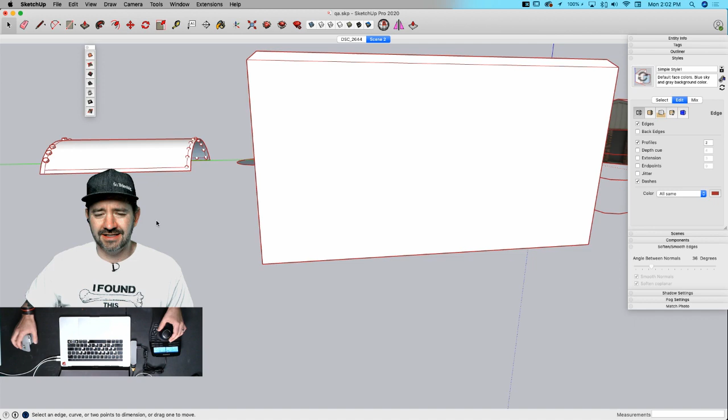But like I said, the general idea here is that these aren't supposed to always be in the model. They're just there for reference. But they exist in a 3D space, so if you go to a spot where geometry blocks them, you can't see them. That's kind of how they work.

I'm not sure how to really, if you want to put dimensions on it, that's kind of what Layout in the back end is for. That's where you'd actually take your model and flatten it into 2D space and then put your dimensions on top of it. Dimensions in SketchUp will get covered up by geometry because that's how 3D space works.

Whatever's closer to you covers up whatever's farther away from you. Well, that's kind of how real life works. That sounded like I wasn't intending to be rude or anything with that.

Snarky. Yeah, it came across snarky. I'm sorry.

So Carson said he found an extension to export cube faces for panoramic stitching, but I'm not sure what the extension was. Panoscene? And Cubic Panout.

So Rune is asking about modeling roof tiles. Use a texture. There is no way to do low poly roof tiles, even if they're just extruded squares - when you have thousands of them, it's going to add a lot of geometry. So use a texture.